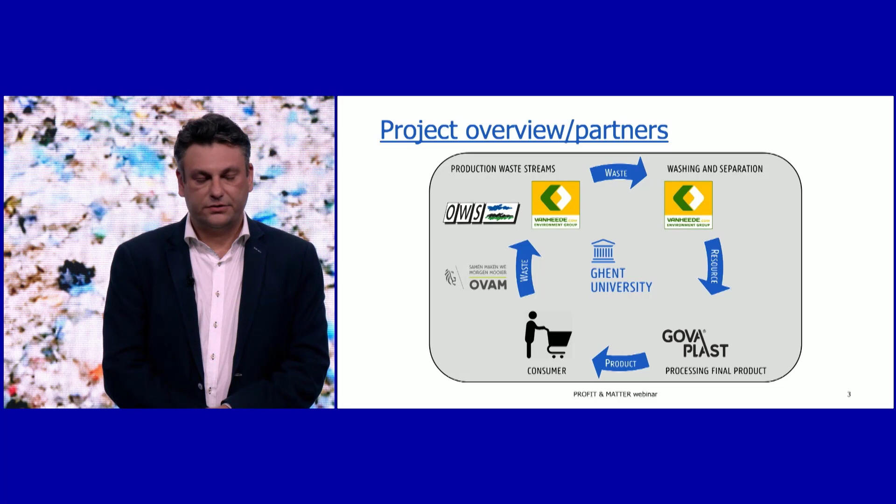Thank you, Nico. I will go further with the technical side of the project. The aim of the project was to develop new value chains for plastics coming from complex waste streams. A key term here is reverse engineering, in which we focus on the physical properties of the end product.

In this way, we will try to recycle and purify these streams up to a level compared to the properties of these end products, and therefore we will implement a fit-for-use separation.

Two case study streams were tackled within the project. One coming from separated food waste, where the food is separated from the plastics. The organic fraction is sent to anaerobic digestion, and the packaging waste is our first case study.

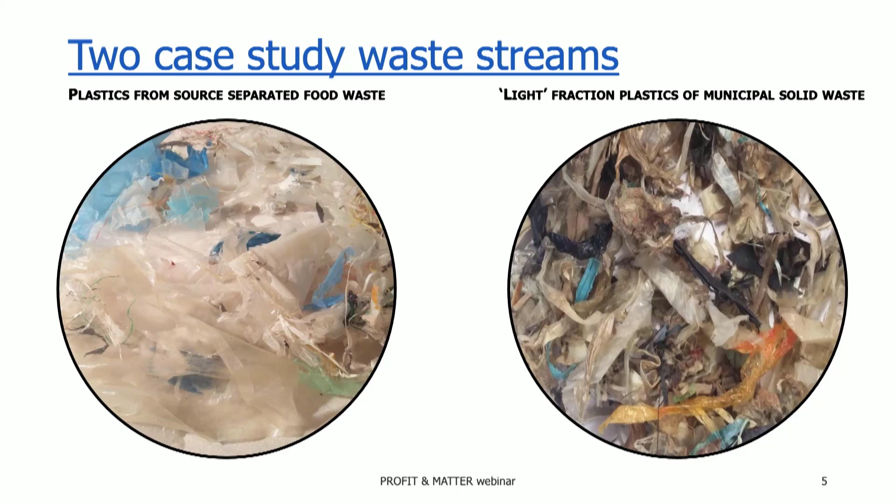A first research area within this project was the separation technologies. It's important to focus this research on new and innovative ways to separate different plastics, and one such technique is selective flotation.

In this project we focused on the sink fraction polymers, PET, PVC, and PS. The principle of selective flotation can be seen in the bottom figure. Here it will be the intention to make one polymer more hydrophilic than the other polymers in the mixture.

It has to be said that in general, polymers are hydrophobic by nature and will therefore adhere air bubbles. Different methods are possible to make one polymer more hydrophilic than the other polymers in the mixture, and this we tackled in the PROFIT project.

The first series of experiments were focused on the treatment and adsorption of surfactants, followed by a flotation in water. In the figure on the left, you see the recovery rates of the different polymers studied. And from these graphs, it's clear that separation is possible.

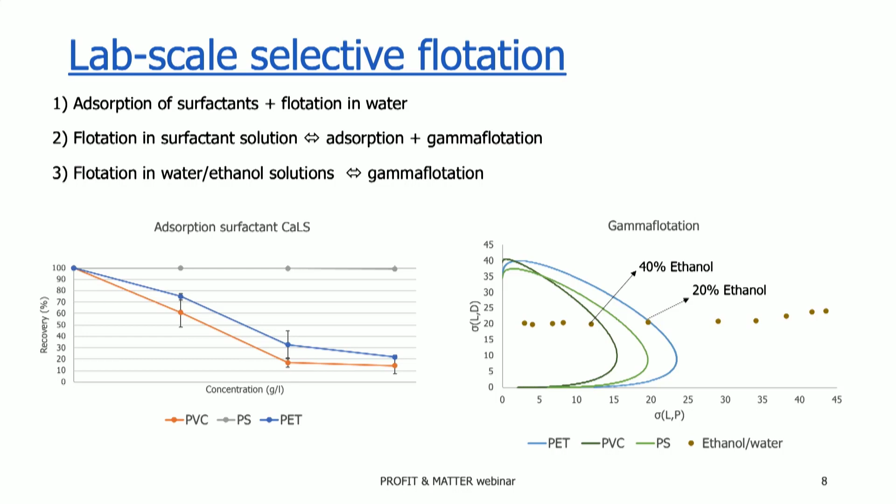And the larger the difference between the different graphs, the easier and the less recirculation of the sink fraction is needed. A second series of experiments were focused on the flotation medium itself, because this also has an influence on the suppression of plastics. Here we did the flotation in adsorption solutions, in surfactant solutions, sorry. And in this way, we were able to suppress more plastics by this technique.

The third series of experiments were focused on gamma flotation. This is a phenomenon in which only the flotation liquid is important in the flotation, in the selective flotation separation. From these measurements, it was clear that we could receive a good separation between the different polymers.

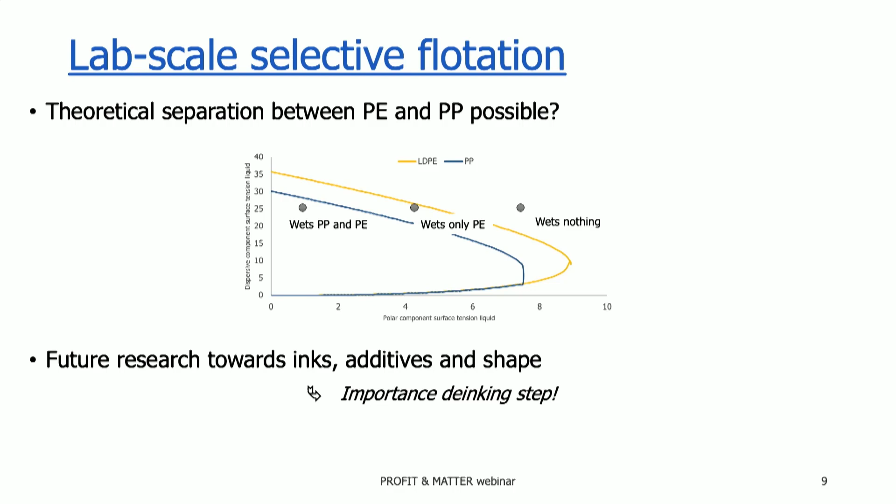In this project, it might even be possible to cause a separation between polyethylene and polypropylene, and this you can see on this figure. This figure is called a wetting envelope and shows in which area a certain liquid will wet the plastics, and that plastic will not be able to adhere air bubbles any longer.

It has to be said that complex waste streams are more complex, and that future research had to be focused on the presence of inks and additives, which has a direct influence on the suppression rate of the plastics. Also shape is an important factor to be covered in future research.

Also on an industrial scale, we did some tests, and therefore we hired a centrifugal decanter. With this machine, we were able to separate the heavy and light fraction of both waste streams into two dry fractions, one heavy one and one light one. The plastics of Vanheede and OWS are showing promising floating solids, and those light fractions can be recycled at Govaerts.

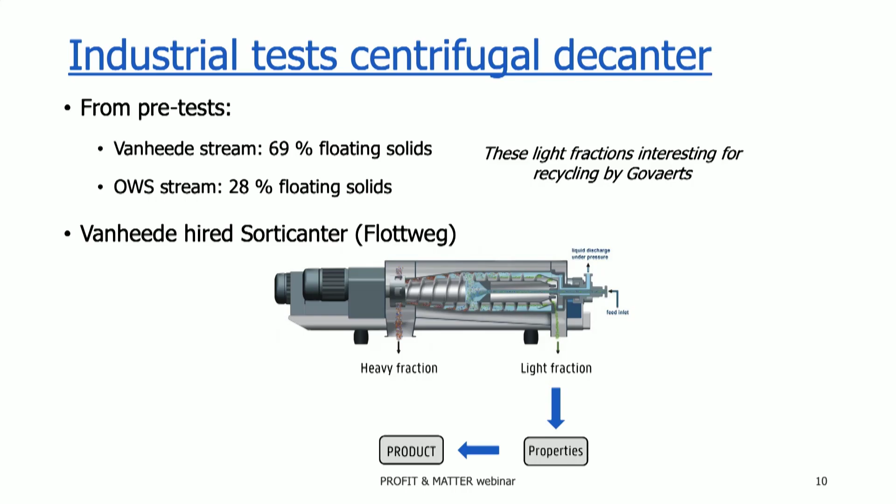The principle of the Sorticanter is based on density, but here the gravity force is partly removed and replaced by high acting centrifugal forces, and therefore the separation is much faster than conventional sink-float setups.

Then the light fraction of the Vanheede stream showed a good composition and has a high polyolefin content. And after separation with the centrifugal decanter, most of the heavy polymers were removed. Then the stream was processed on a lab scale, and the properties were determined, and they showed good properties.

But the problem is still that a large fraction of wood is available in the stream, and there is also still a presence of bad odor. It also has to be said that the machine is prone to blockage for certain waste streams.

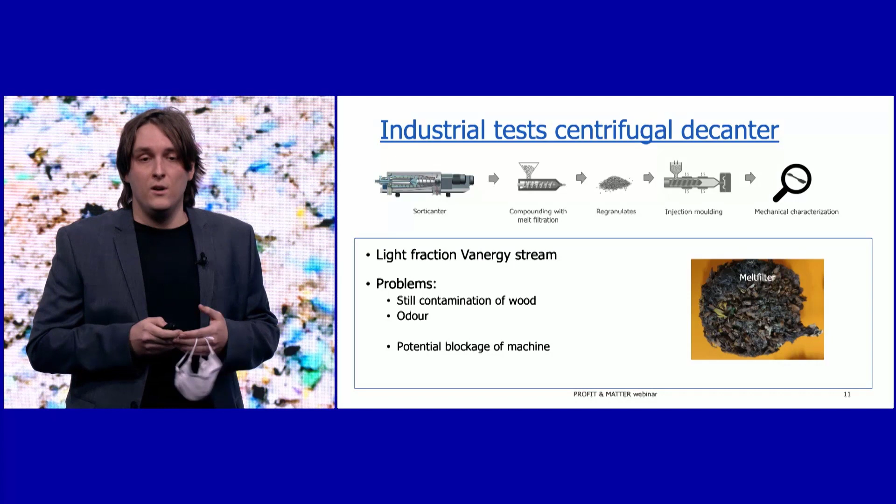Hi everyone, my name is Martijn, and I will now present you the results we have achieved within the PROFIT project to improve the pre-treatment of plastic waste. I will start with our research into the deodorization of plastic waste.

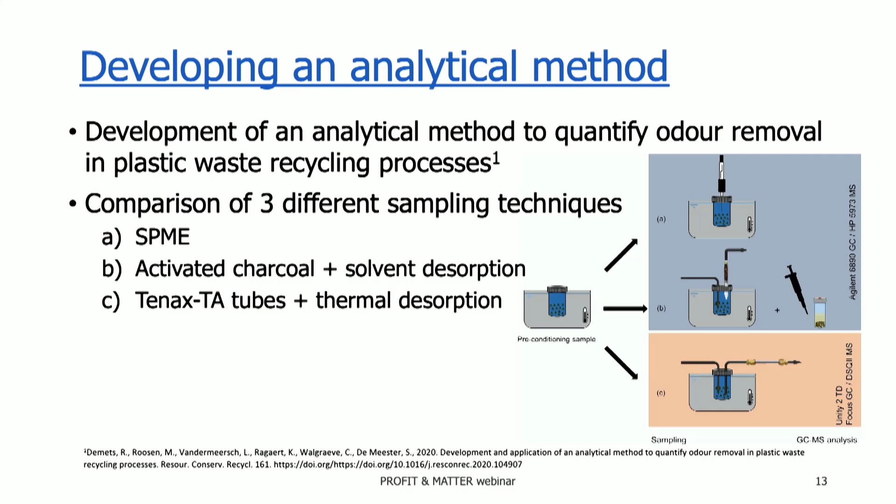So for this, we first developed a method that is able to quantify odor removal in plastic waste recycling processes. For this, we have compared 3 different sampling techniques. First of all, SPME. Our second technique was activated charcoal in combination with solvent desorption, and the third technique was Tenax tubes in combination with thermal desorption.

With those 3 different sampling techniques, we were able to identify 73 different odorous constituents that were present in a post-consumer plastic waste stream. We have categorized those 73 odorous constituents into different chemical classes, such as terpenes, sulfurous components, and oxygenated components.

Comparing those 3 different techniques, we saw that, for instance, SPME showed quite high applicability, but that this technique is not so good to achieve repeatable results. But on the other hand, again, with SPME, it is quite easy to identify the components.

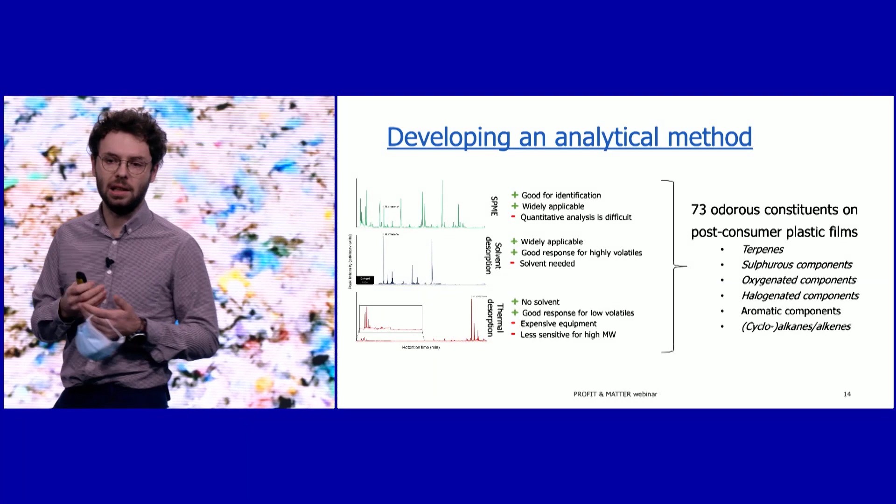The second technique that we tested was solvent desorption, and also this technique is widely applicable. Moreover, this technique shows a good response for the highly volatile components. But for this technique, of course, a solvent is needed, which is, again, a disadvantage.

For the thermal desorption method, no solvent is needed, and a quite good response for the low volatile components was achieved. But the disadvantage here is that it was less sensitive for the high molecular weight components.

We have applied those 3 different sampling techniques in a case study where we monitored the potential odor-causing components through a recycling chain. As you can see on the figure on this slide, we identified quite a lot of odor components on the dirty films, shown on your left-hand side.

We have categorized them as a function of their boiling point and their octanol water partition coefficient. This last coefficient is a value for the polarity of those components.

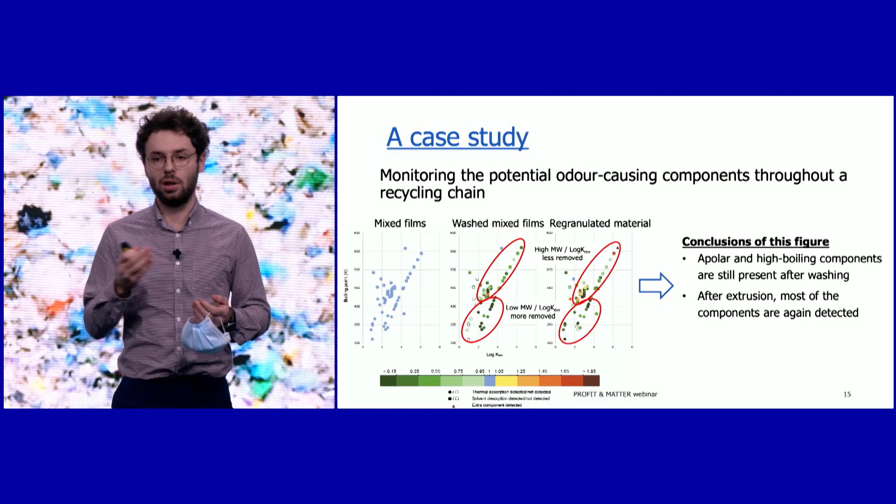After washing, we saw that most of the odor components were reduced in intensity, which is of course because they were washed. But we also saw that the more polar components were more removed, since their color is more dark than the more apolar components. This can be explained by the fact that we used water as a washing medium.

Then after the regranulation step, we see that certain components are present again, and even in a higher concentration than the initial concentration, as you can see on the slide where the components are visualized in red.

So the main conclusions of this slide are that apolar and high boiling components are still present after the washing step, and secondly, that after extrusion, most of the components are again detected, and sometimes even in a higher concentration.

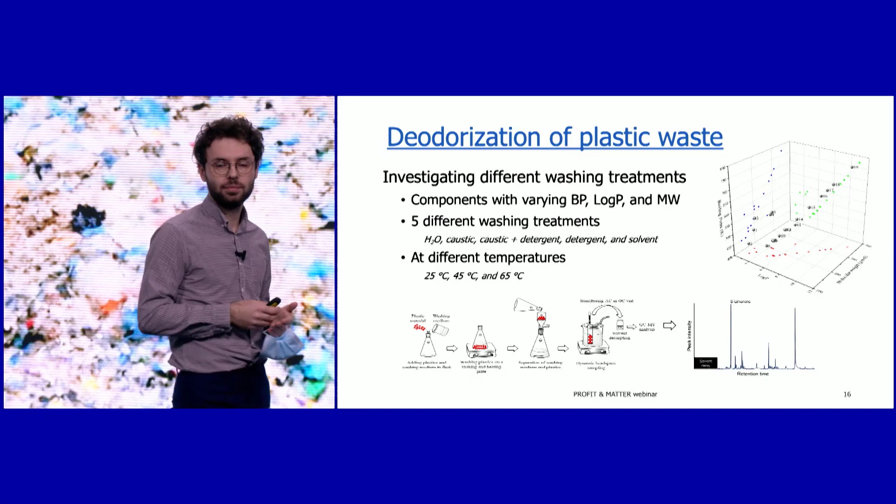Then our next step of our research was to investigate more fundamentally the deodorization of plastic waste. To this, we have first selected 19 odorous components that have a varying boiling point, octanol water partition coefficient, and molecular weight. And we have applied 5 different treatments, namely water, caustic soda, a combination of caustic and a detergent,

only a detergent solution in water, and a solvent. We have performed our analysis at 3 different temperatures, namely 25 degrees Celsius, 45 degrees Celsius, and 65 degrees Celsius.

As a next step, we have then linked the experimentally obtained results to a kinetic and isotherm model. Here we saw that from all the models that we tested, the Fritz-Schlunder isothermal model in combination with the reversible first-order kinetic model gave the best fit.

When we look at the results, we see that sodium hydroxide, so caustic soda, was not so efficient to remove odorous constituents, even less efficient than water, actually.

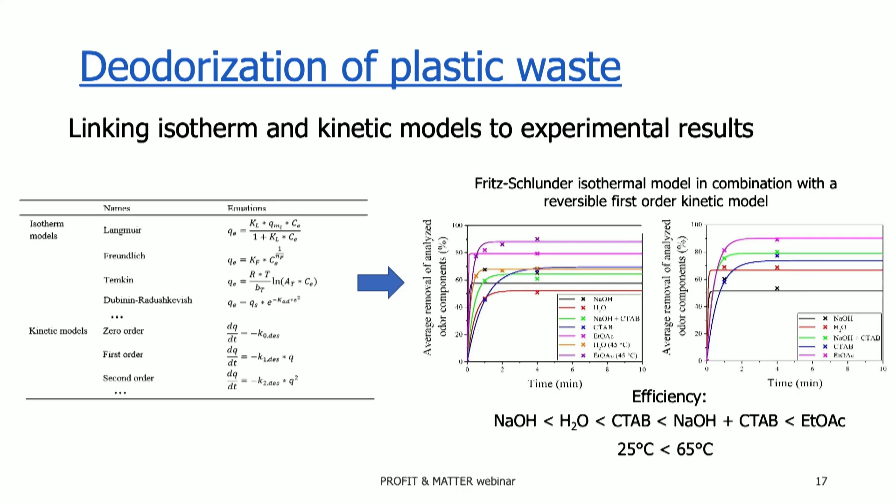By adding a detergent, in this case CTAB, the removal efficiency was seriously increased. And the best removal efficiency we obtained by applying a solvent, in this case ethyl acetate.

Another thing that we saw is that the higher the temperature, the better the deodorization. So 65 degrees Celsius gave better results than, for instance, 25 degrees Celsius.

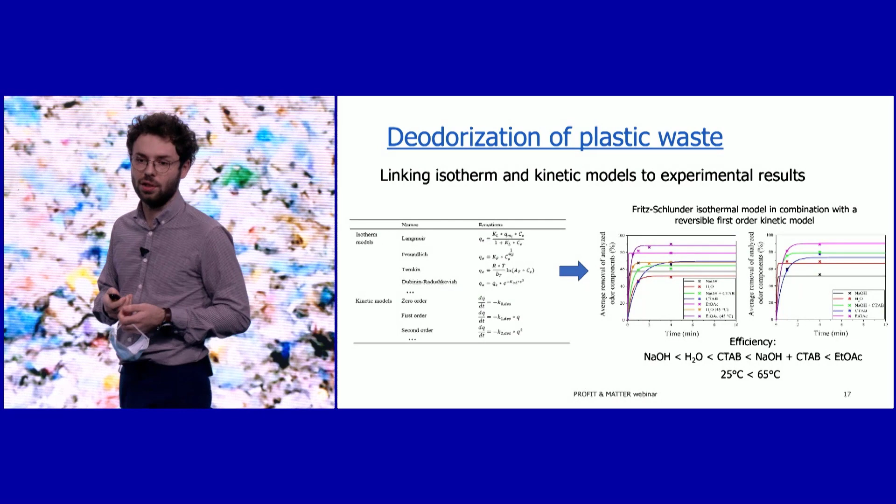These things can be explained by considering the deodorization process as a solid-liquid extraction process. Typically, such a solid-liquid extraction process is influenced by the polarity of the extraction medium and by the temperature, what we also saw for deodorization.

Then, as a next step, we have performed some Aspen simulations to investigate a bit more in depth some industrially relevant parameters, such as solid-liquid ratio, residence time, and recirculation rate.

What we saw here is that the solid-liquid ratio was quite an important factor, since the higher the solid-liquid ratio, the lower the efficiency that we obtained.

On the other hand, the residence time is not very important, let's say, because what we saw is that an equilibrium was already achieved after 2 minutes.

But our third factor, the recirculation rate, again is a quite important factor and maybe even one of the main hurdles to increase the deodorization efficiency, because what we saw is that applying a recirculation rate of more than 60%, as you can see in the yellow circle, significantly drops the deodorization efficiency.

Knowing this and taking into account that currently most companies apply a circulation rate of more than 90%, this explains, of course, the relatively low deodorization efficiencies that are currently achieved.

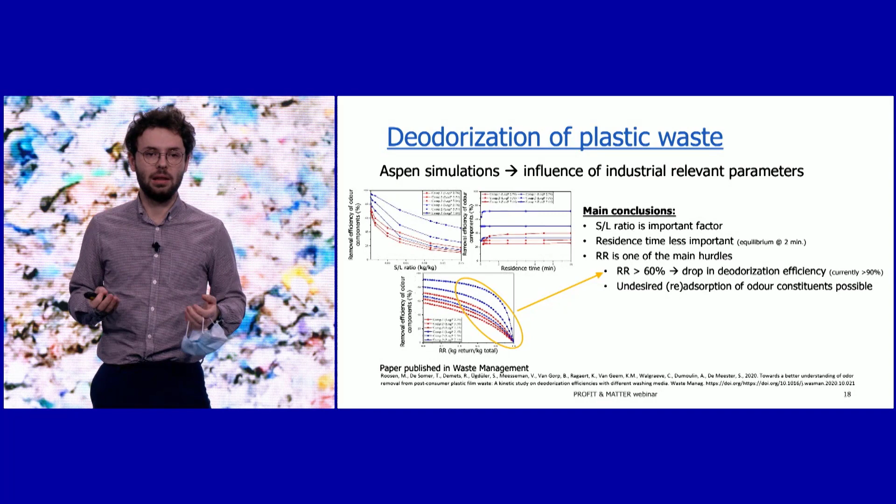If you think back to our kinetic model, which was a reversible first-order kinetic model, this can explain our results, because what we see is that not only desorption takes place, but at the same time also adsorption from the washing medium to the plastics can take place.

Now I will shortly introduce our research into the de-inking and delamination of plastic waste. What we have done here is we have tested different mediums and at different conditions, and we have always optimized our procedure until at the end we had a method that was able to remove all the inks and adhesives present on plastic films.

So you can see here some results that we have obtained, with on your right-hand side a completely de-inked plastic film stream.

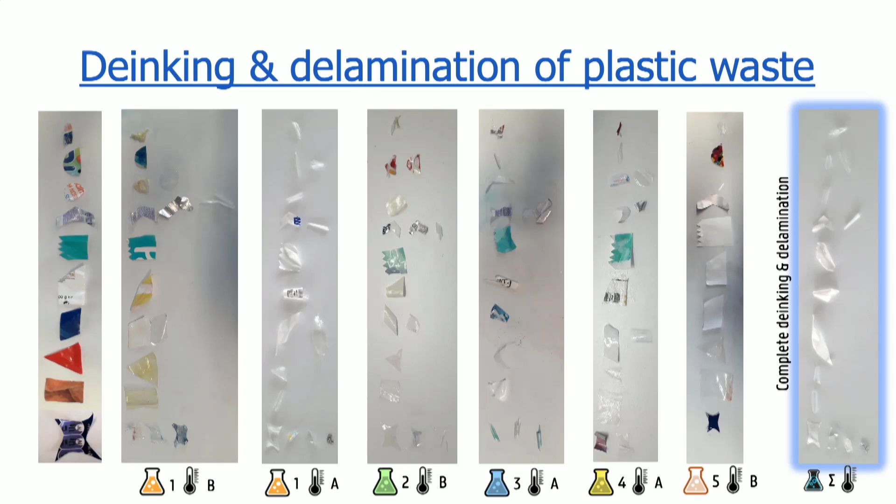As a next step, we have optimized this method, and for this we first developed a method to quantify both the de-inking efficiency and the delamination efficiency.

The method to quantify the de-inking efficiency is based on color mapping, and the method for the delamination efficiency is based on an FTIR analysis. As such, we were able to optimize our process in terms of solid-liquid ratio, shear rate, temperature, and so on.

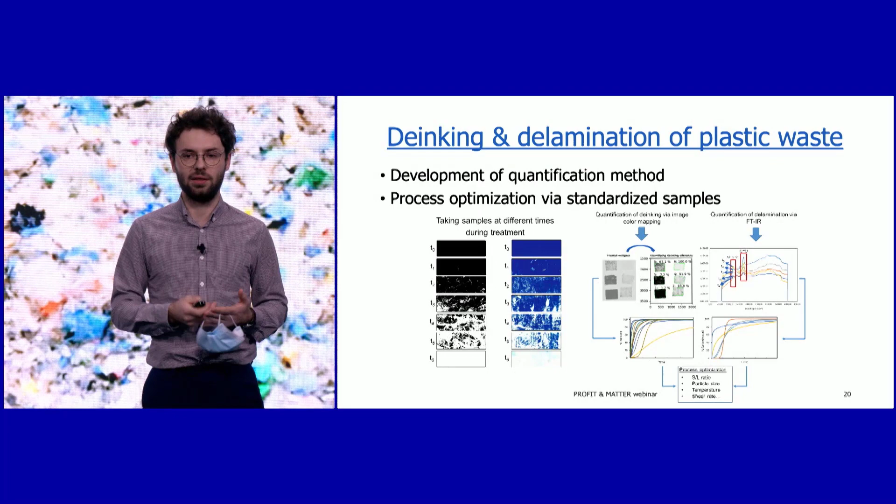We have filed a patent for this method, so at this moment we cannot fully disclose our method yet, but we can say that we have tested our method on a real waste stream, as you can see in the picture on this slide. This gave very good results. As you can see, all the printed films were de-inked after our procedure. We are currently doing research to upscale this method, so in the future this might be applied by industry.

We will now see two videos, one from my colleague Ruben, who you already saw, and one from my colleague Sibel Ugdeler. Ruben will first show the film blowing process, and then Sibel will show you the de-inking process in the lab.

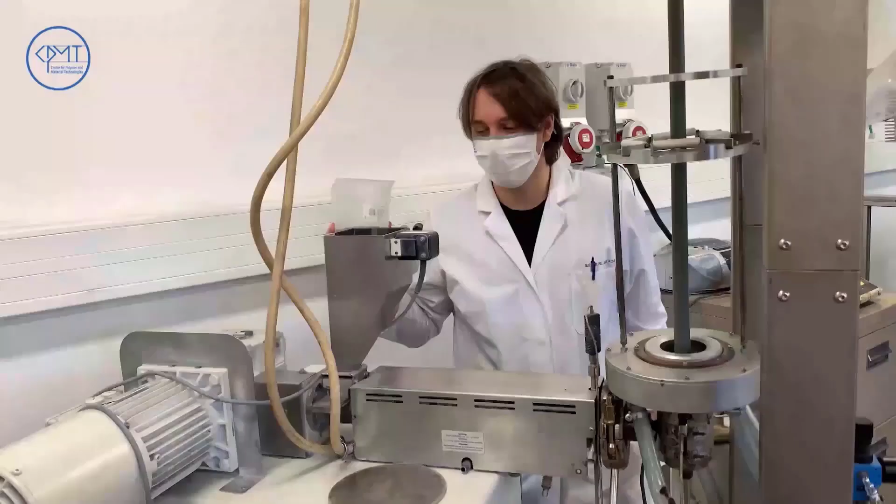Plastics coming from packaging waste pose a major recycling problem. Creating closed-loop systems for these valuable materials is difficult. Post-consumer waste streams, like the ones considered in the Matter and Profit project, contain a lot of plastic and non-polymeric contaminants, such as metals, paper, and wood. In this video, we are showing the film blow process. This polymer processing technique is very delicate, and the presence of these contaminants will cause problems during processing. You can also see that recyclates often have a dark color. Therefore, research on de-inking, delamination, and on separation of these contaminants is crucial.

Hi, my name is Sibel Ugdeler. I'm a PhD student at the LCPE Research Group at Ghent University. Now I will demonstrate some experiments on removal of different types of inks from plastic films.

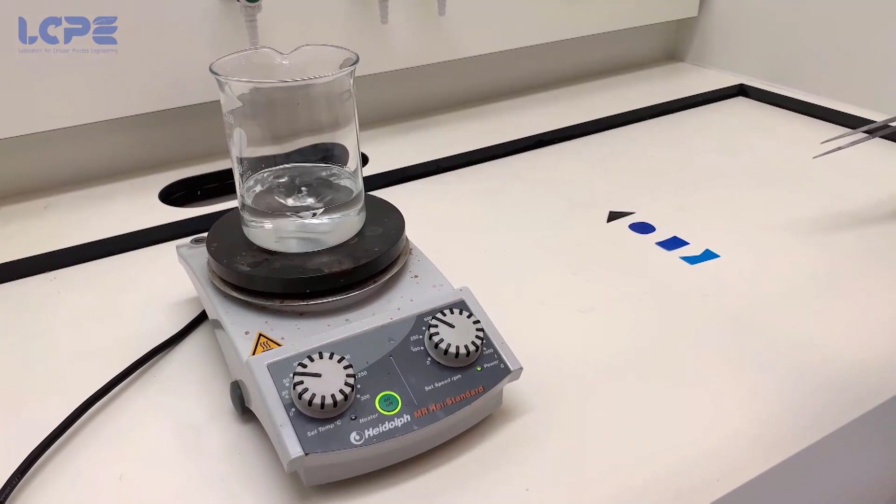Here we have 4 different samples. The first two are printed with solvent-based inks, the next one is with water-based ink, and the last one is printed with UV-based ink. After we cut them into different shapes to recognize them more easily, we bring them into contact with the de-inking medium.

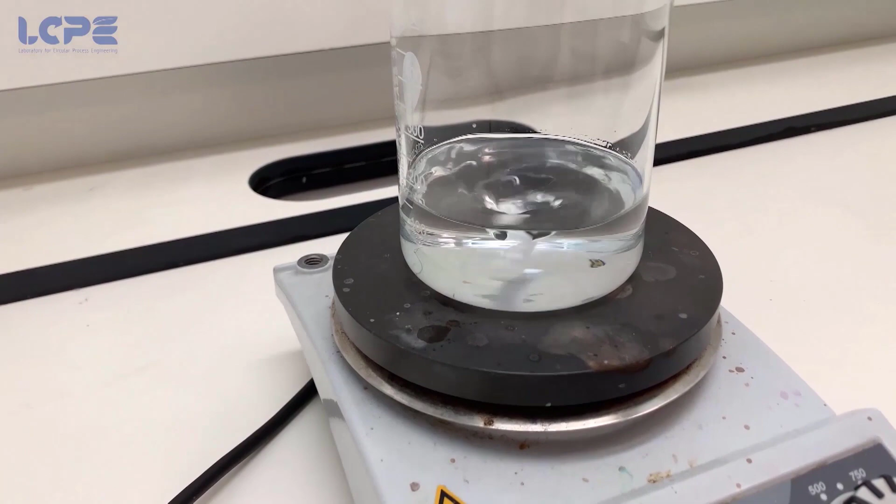Normally, UV-based cross-linked inks are one of the hardest inks to remove. But as you see here, with our developed de-inking procedure, we are able to remove all different types of inks successfully and in a short time frame.

As you can see here, in case of multi-layers, first we delaminate the sample before the de-inking step.

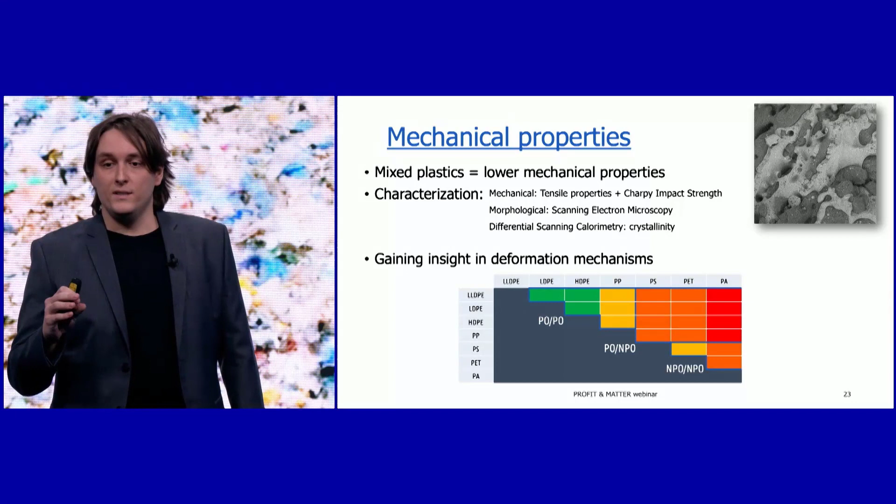A third area within the research of Profit was on the recycling quality of waste plastics. Mixed plastics, when remelted, form a phase-separated structure, and therefore often have lower mechanical properties. In order to map the influence of different polymer combinations, we produced blend series, and for these blend series the different mechanical properties were determined. The morphology and crystallinity of these polymer systems were also considered.

The table on the slides shows the theoretical compatibility between the different polymer pairs. With this research, we gained insight into the occurring and changing deformation mechanisms of these blend systems.

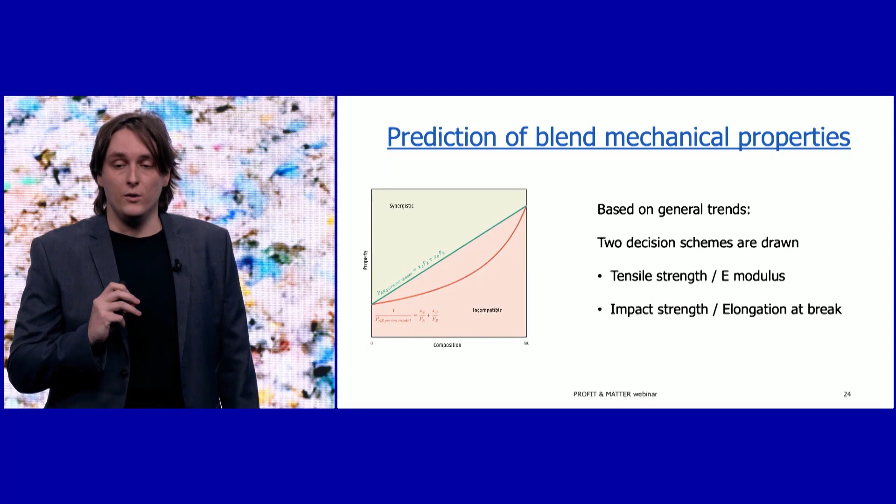Next, we set out the properties and function of the contaminating polymer, and based on general trends we were able to devise two decision schemes. One is focused on tensile strength and elastic modulus. Another one is on impact strength and elongation at break. This is such a scheme.

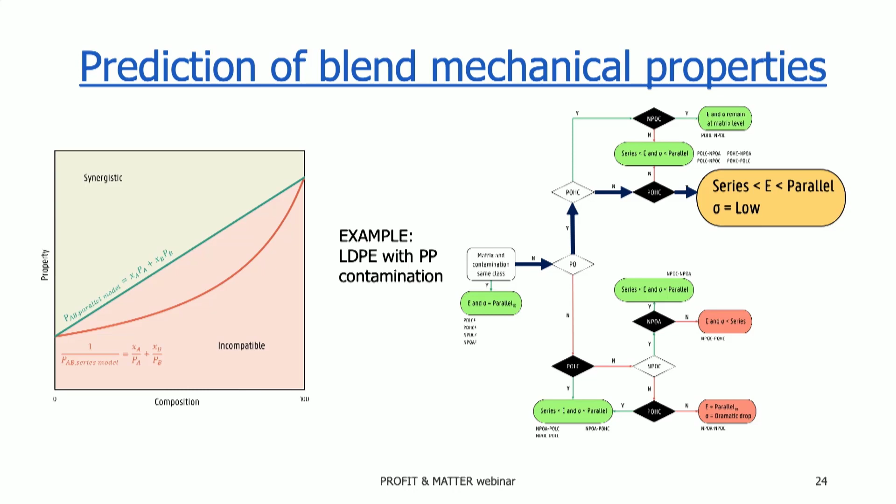This scheme should give a clear image of the recycling potential of a plastic stream. A little example: if you have an LDPE contaminated with PP, the scheme will tell us that this will lead to these properties.

Of course, future research will focus on improving these predictions of mechanical properties by gaining insight into mixes of different grades of polymers, and also on the influence of non-polymeric contaminants.

In the Profit project, we also reflected on the total quality and the features that are important for the total quality of waste plastics. We focused on optical properties, content of harmful substances, and processability. In next research, we will try to combine these different features into a single recycling quality factor, ranging from 0 to 1. We want to create a quick vision of a waste stream's quality based on this recycling quality factor and on the pretreatments required to gain new recycled waste products.

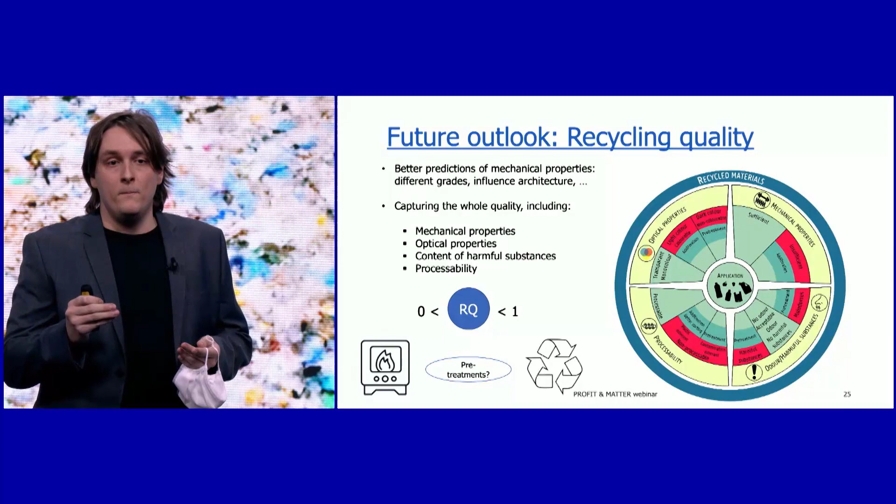Now we will see another video by Vanheede that will show the reflections of Vanheede on the Profit project.

Vanheede Environment Group is a fully integrated waste management company, and our aim is to be active in the circular plastics economy. In the Profit case, we can collect and sort the plastics in our automatic sorting plant, and the final recycling step is also done in-house. Our collaboration within Profit gives us the opportunity to test several plastic waste streams and to meet potential partners in the whole supply chain. This is useful for establishing a circular business model for plastics.

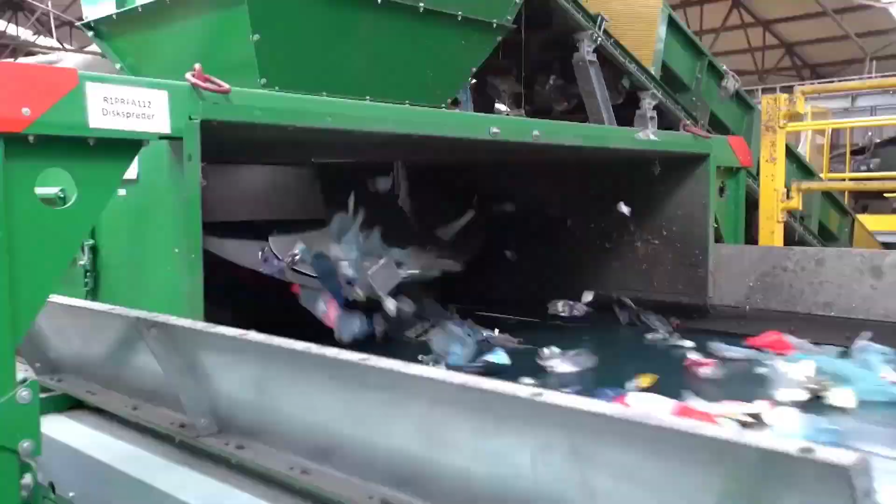We had very good support from Professor Steven de Meester and his Ghent University team. They provided support for the academic and the very practical issues.

There we have it. That was quite condensed and at quite a high pace, a lot of the results from the PROFIT project. As you can see, a lot of scientific and technical advances were made that help us understand better what these plastics are, what their challenges are, and how we can advance towards solving them. But we're also not quite there yet. So this type of value chain cooperation remains very important also towards future projects, to keep doing exactly that and to keep advancing us to full circular plastics.

With that, we can wrap up the first part, which was the presentation of the PROFIT project results. And we are now moving on to the second project, which is the MATTER project.

MATTER handled the streams coming from the P+MD bag and was, as a project, coordinated by the company Indaver. That is why, to present to you these results, I would like to invite Mr. Erik Moerman from Indaver.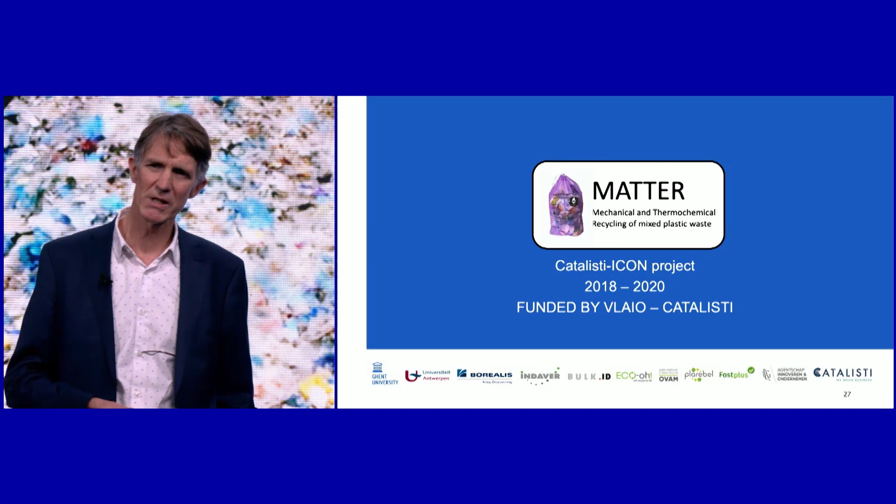In the slides that will come after mine, you will see what the successes are. I think it's also important to mention that next to these partners, there are also some stakeholders that we involved - experts in the recycling of plastics, which are OVAM, Plarebel, and also Fost Plus. Fost Plus will also be part of the panel discussion later on - their expertise was very welcome. We brought all these partners together, and that was definitely with the help of Catalisti, who helped us write the project, looked for the right expertise and so on. We are very grateful that Catalisti was helping us with this project.

And at the end, I think we need to thank Vlaio, because the money that we used to go through the different steps of the project came from the Flemish government through the body Vlaio.

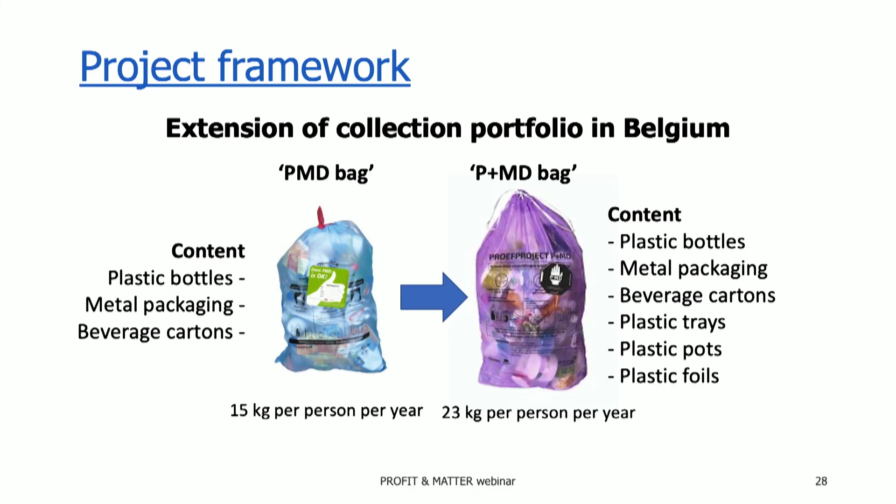The base of the project, where this started, was this new initiative to extend the blue bag as we know it in Belgium, where we have collected for many years the different packaging waste from households. At a certain moment it was decided to extend these bags to new fractions, mainly fractions of plastic waste, like plastic trays, plastic pots, plastic foils. With this, the amount of packaging waste collected increased by an extra 80 to 100,000 tons per year in Belgium.

Now, what was the goal of the project? At the end, we were able to develop a set of criteria to support the decision towards the optimal plastic waste management scheme. What is a good, or complete, waste management scheme? That starts with really knowing the waste - and Martin, who follows after me, will explain a little bit more on that. But you have collection, you have sorting, you have pre-treatment.

I think what is quite unique in this project is that we also made comparisons between mechanical recycling, a technology that already exists for many, many years, and thermochemical recycling. We compared both, and the comparison was made based on two evaluation tools: on the one hand the technical-economical analysis, and on the other hand the LCA. Before jumping to the final conclusion, I can already say we really see there is a big gain to be made in terms of CO2 avoidance by recycling these extra plastics.

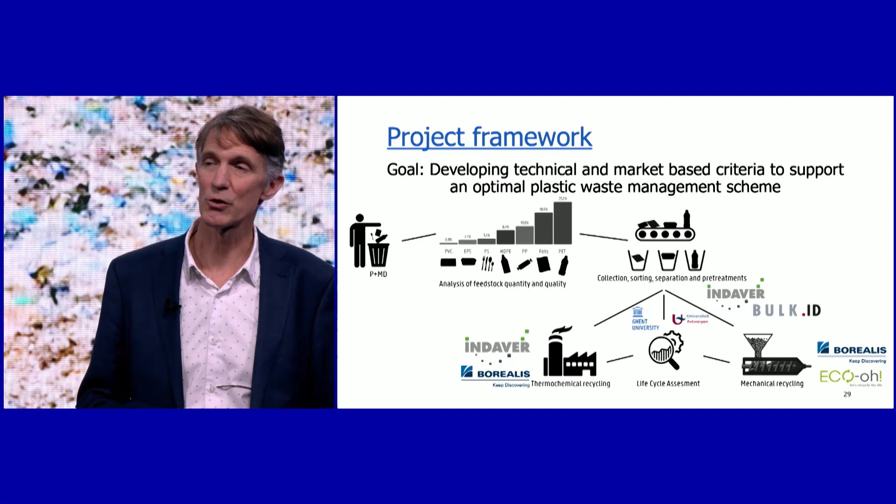So I would like to give the floor now to Martin. Thank you, Erik.

Hi again. So I will now present you the first work package of Matter, namely the analysis of the feedstock quantity and quality. To recycle plastics in high-value applications, it is important to know the composition of the waste. And by the extension of the blue bag, there came some new waste streams on the market that were not fully known yet. Therefore, we decided to first characterize those new waste streams.

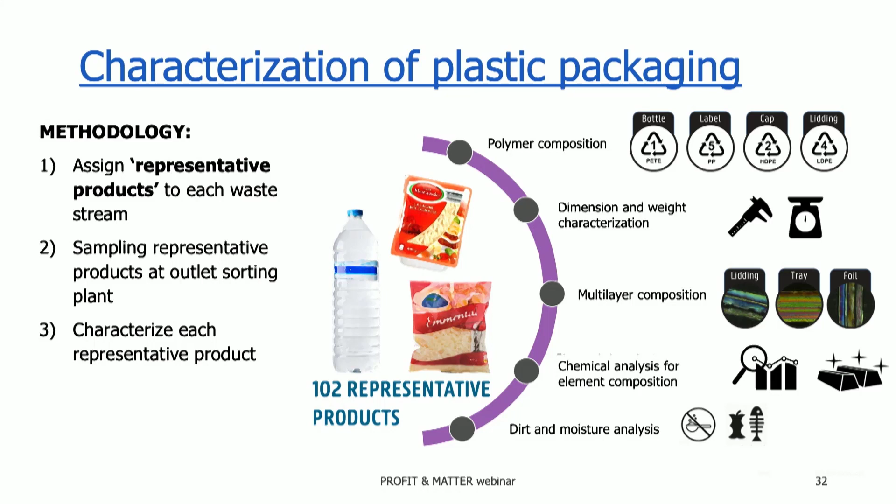For that, we have applied the following methodology. First, we have assigned representative products, as we call them, to each waste stream. A representative product was selected based on the sales numbers of the biggest Belgian food retailer. By this methodology, we were able to cover a more relevant fraction of packaging products present in waste, and we were also able to average out seasonal and geographical variation.

After assigning those representative products, we sampled different representative products at the outlet of a sorting plant, and then started characterizing them in the lab. This included, among others, the polymer composition, the elemental composition, the moisture and dirt fraction, and so on.

Furthermore, we have divided each product that we selected into its separable components. So for instance, a PET tray we divided into the tray itself, the lid present on the tray, and the label present on the tray. We have analyzed each of those different separable components individually.

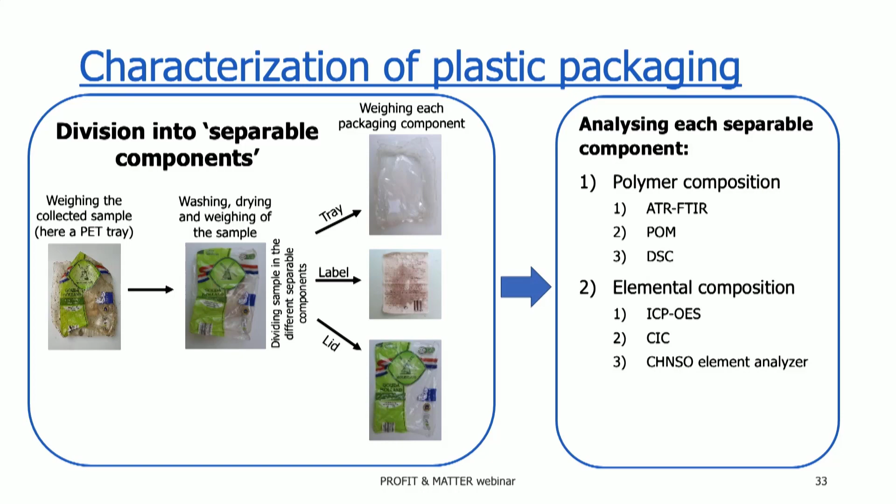On each component we applied ATR-FTIR analysis, POM analysis, and DSC analysis to characterize them in terms of polymer composition. We also applied ICP-OES analysis, combustion ion chromatography analysis, and CHNSO analysis to determine the elemental composition. Here on this slide you can see the polymer composition.

We don't have enough time to go into detail, but I will guide you through the main conclusions we can draw from this figure. For PET bottles, we see that a relatively pure stream is achieved, but caps and labels present can contaminate this stream, which mainly consists of polyethylene and polypropylene.

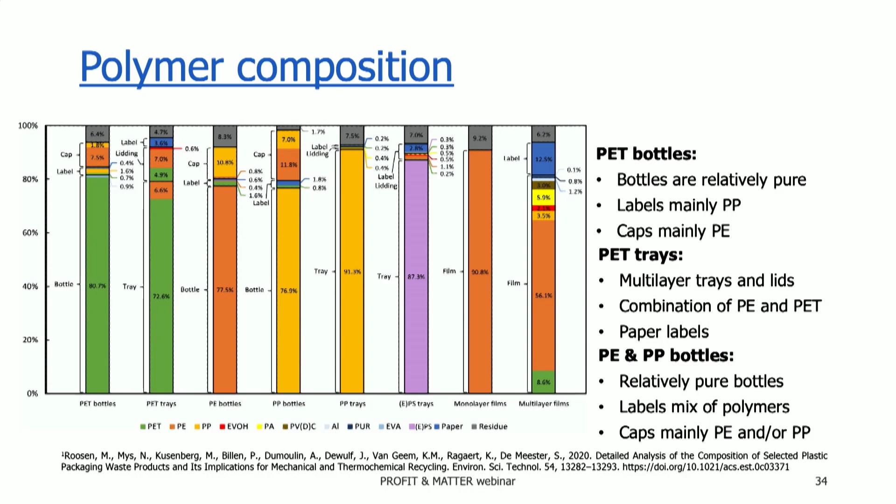PET trays are a bit more complex because they are often multi-layer, consisting of polyethylene and polyethylene terephthalate. Also, sometimes there are paper labels present on the PET trays. The PE and PP bottles were relatively pure streams again, but labels and caps with a composition like polyethylene and polypropylene can again contaminate these streams.

For the trays, we saw relatively pure streams for PP and EPS, but again labels and liddings can contaminate these streams. For the film stream, we distinguished between monolayer and multilayer films. The monolayer films mostly consisted of polyethylene, but for the multilayer films, many different polymers were present, among others PET, PE, PP, EVOH, polyamide, and so on. Also, sometimes those multilayer films contain a certain paper label.

This polymer composition is very important for mechanical recycling, because what we see is that if certain polymers are blended together, this can deteriorate the quality of the recyclates produced. This can be explained by the morphology of those blends, which sometimes have a droplet matrix morphology, which can induce propagation of cracks and brittle behavior.

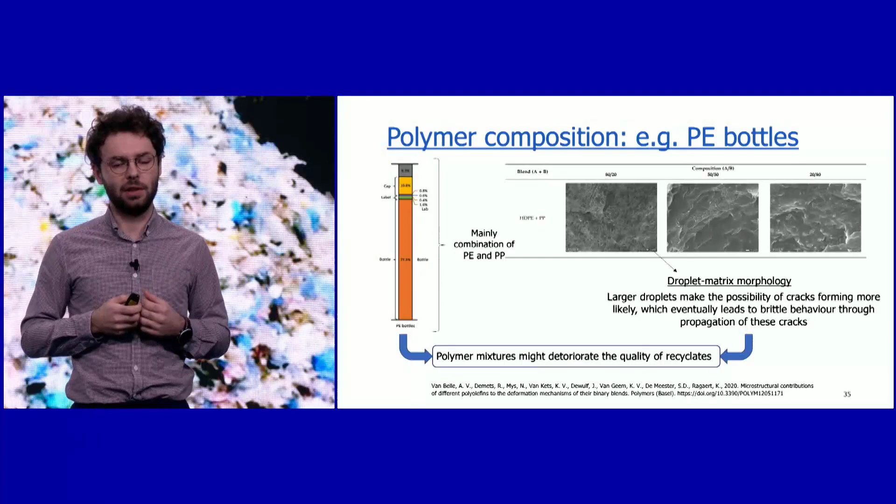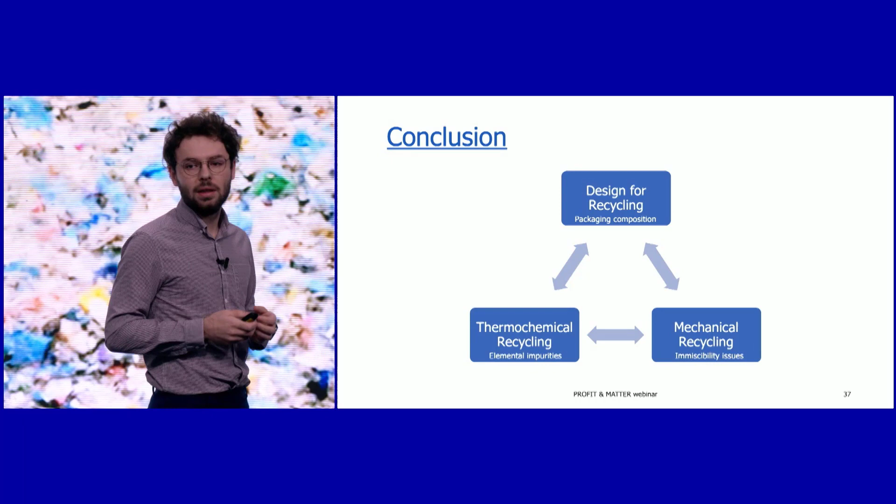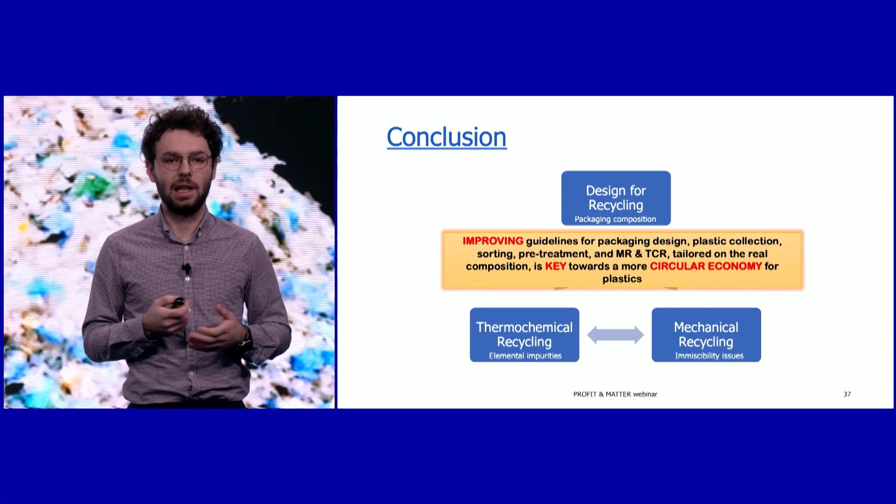As a conclusion, I would like to say that both thermochemical recycling and mechanical recycling are still facing certain issues or challenges. I have put a third factor here on this slide, and that's design for recycling, because often those issues come from complex packaging. Working together within those different factors can really improve recycling. So improving guidelines for packaging design, but also for plastic sorting, pre-treatment, and mechanical and thermochemical recycling is really necessary, tailored to the specific composition of waste towards achieving a more circular economy for plastics.

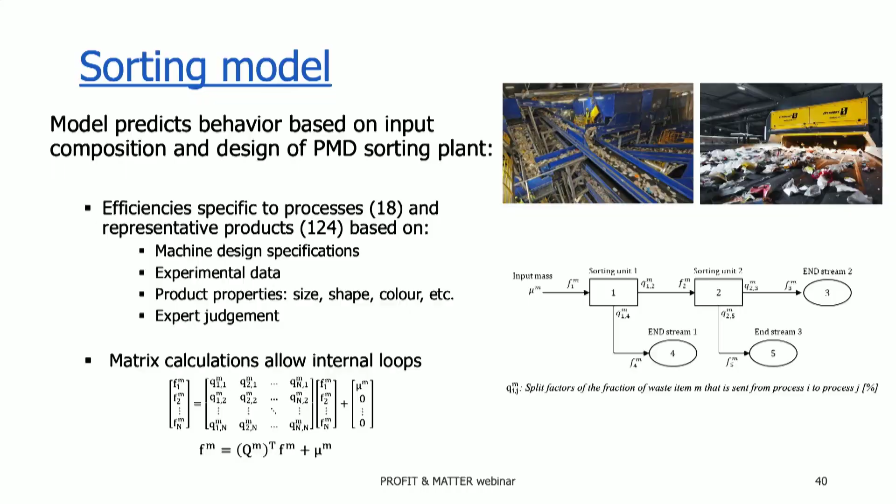But in this case, we thought, in fact, we want to develop scenarios to compare mechanical and thermochemical recycling. We want to make scenarios, so we want something more modular compared to sending one big bag of waste, which is difficult to take in a representative way. So we wanted a model to do this in a more flexible way.

If you look at a sorting plant, as I mentioned, it's very complicated, but while the amount of equipment is high, the types of equipment are not. In general, there are NIR separators, ballistic separators, eddy currents, drum sieves, and a few others. The different types of equipment number only around 7 or 8 or so.

So we thought if we know this process a bit better, then maybe we can develop a flexible model to predict how waste flows through these sorting plants.

At that point in time, that was a big job, but we had a good thesis student. Thesis students are the free labor of universities, in case they are good, of course. Sometimes they are also the opposite. But if you have a good thesis student, you can make nice progress, and in this case we were lucky to have someone like that. We just said, let's start this and see where we end up.

What we did was look at these sorting plants from a real system view, and we see that every process has a certain separation efficiency, which we call a split factor. This split factor determines if you have 100 PET bottles going into a process, like a NIR PET sorter, how much of these PET bottles end up in the positive direction. But also, if there is still PS on that conveyor, how much of the PS is mis-sorted on a PET NIR, and so on. So we have positive and negative sorting.

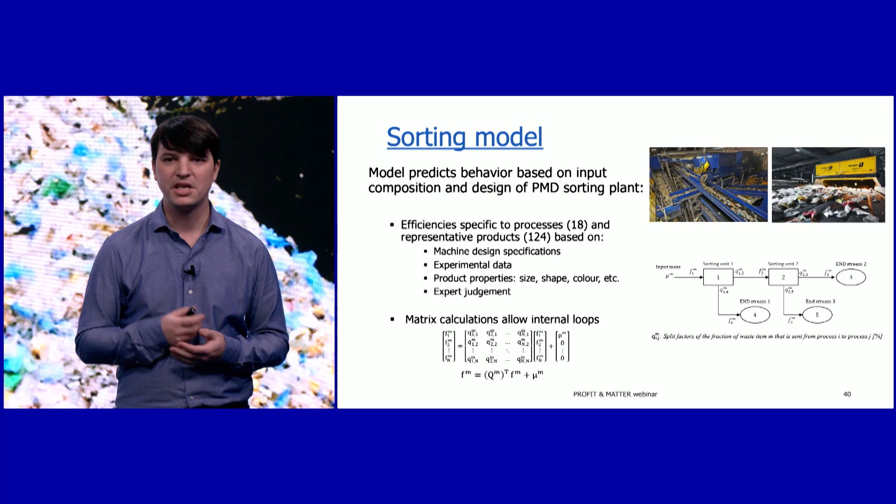In the end, we put this into a nice mathematical formula. As many PhD students know, if you work on recycling in Excel, Excel doesn't like loops, and then it crashes. So if you want to avoid loops, and of course sorting plants have a lot of loops, we used an elegant matrix calculation to overcome this problem, I would say.

So what we then did, we made this big table, what we call a split factor table, which basically says which types of products—by the way, the same products as those that we analyzed in work package 1—go where. In the rows are the types of products, and in the columns are the types of equipment present in a sorting model.

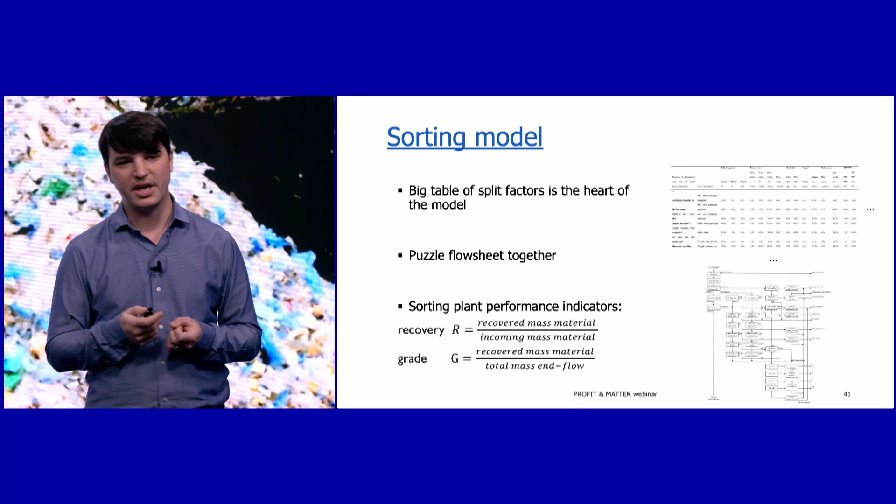So we developed this big split factor matrix. This is really the heart of the model. Based on the matrix calculations, we can model any type of sorting plant, so we can flexibly adjust the type and design of a sorting plant, and the model gives you the output bales. For these bales, we define the recovery, which is, if you put 100 PET bottles in at the entrance of the sorting plant, how many PET bottles do you get out in the PET bales. Then the grade is, in the PET bale, how much other product, how much PET is really in there, how much contamination. So the yield and recovery, or grade and recovery, is what you finally get out of the model.

So we validated the model. That's, of course, as with any model, important to do. On the top left of the slide, the orange bars show we validated this on the PMD. In Belgium, the PMD was actually already running, so we had experimental data to compare our model results with. We were pleasantly surprised that we had quite a good comparison between the model results and the experimental data, which gave us confidence that this modeling approach is not so bad.

So we went on and tried to predict the P+MD scenario. At that point, around one or two years ago, we didn't have much data, especially on the new sorting plants being built as we speak. So we didn't have that data yet, but we were able to see, if you give the expected P+MD input composition and the expected designs of sorting plants, what recoveries and yields would we achieve? We were pleasantly surprised to see that the sorting plants about to be built will probably, according to our modeling results, meet the specifications required in most categories.

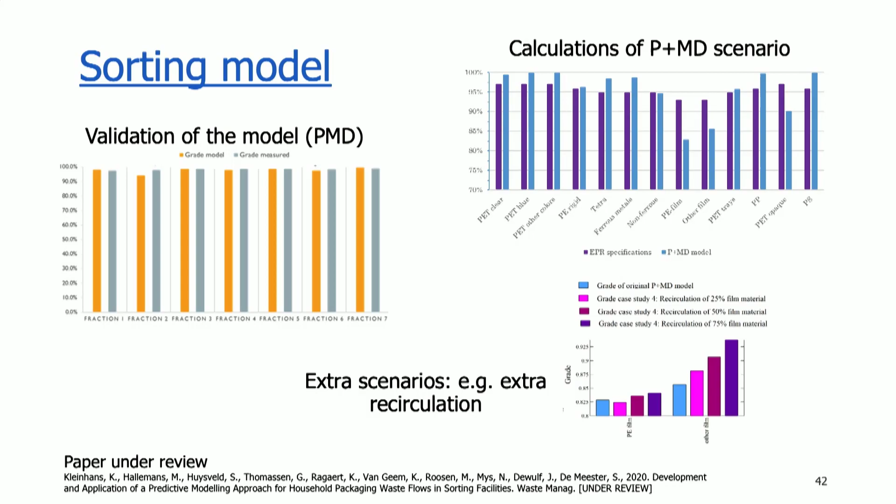There was a bit of danger, going from PMD to P+MD, that nice fractions like PET and HDPE bottles would become more contaminated. But in fact, our results show this is quite okay. Even after making the bag more complex, these new sorting plants, which are more complex compared to the PMD system, are still able to achieve high purities for the PET and HDPE bottles. So that was very nice to see.

The film fraction is a bit more difficult, because you have PE films and other films, and the sorting plant has to play between how much PE film purity it can really achieve compared to the other film fraction. We also face some difficulty defining what is a PE film and what is other film, because many films contain some PE, and it's hard to decide where to put the boundary between the two. So the film stream is quite a complicated one.

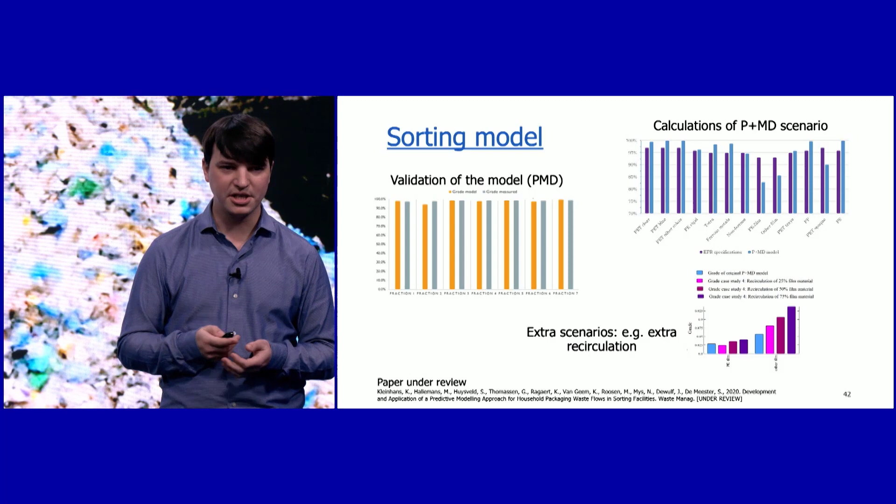We also did some scenarios, because the film stream is one of the more difficult ones, creating internal loops in the sorting center to predict how these loops affect the purity and recovery of the film fraction. This shows that you can use new designs and route other products through the sorting plant in the model and see how they come out, and also change designs in the sorting plant to see how that affects the recoveries and yields.

In my opinion, the true power of what we did, if I'm allowed to say so, is that we can combine work package 1 and work package 2. Work package 1 has a very detailed compositional analysis, where we have these products well defined, the caps, the bottles, the liddings, the labels. We know how much chlorine is in a label, how much metal is in a cap, so we have a very good understanding of the composition. If we combine this through the model, we are able to say, without going into the details currently on the slide, how many caps are there.

Also, what I didn't stress too much yet is the LAMD, the level of attached moisture and dirt. So how much of that moisture and dirt do we expect in every bale? How much metals come through mis-sorting in a certain HDPE bale? Or how do films distribute throughout a supply chain, throughout the sorting plant, and which fractions do they end up with? And with that, how many labels on these films end up in these streams?

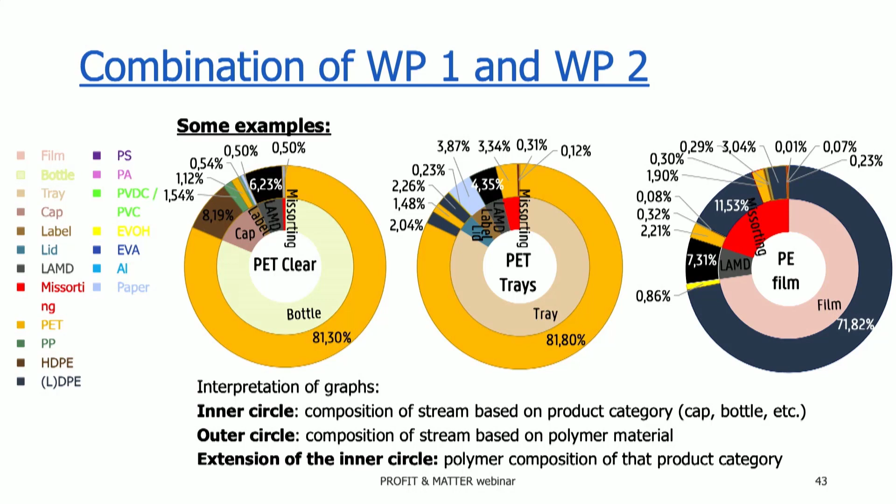So the positive and negative sorting we can predict on a deeper level, in my opinion, comparing how this affects the total metal concentrations or polymeric compositions of these different bales that you expect in a system. Summarizing, we have developed a model where you can give in your input stream, puzzle your flow sheet of the sorting plant together, and combine this with elemental, metal, and polymeric compositional analysis to predict how these bales come out, which is relevant for both mechanical recycling and thermochemical recycling. This is important feedback for the later work packages.

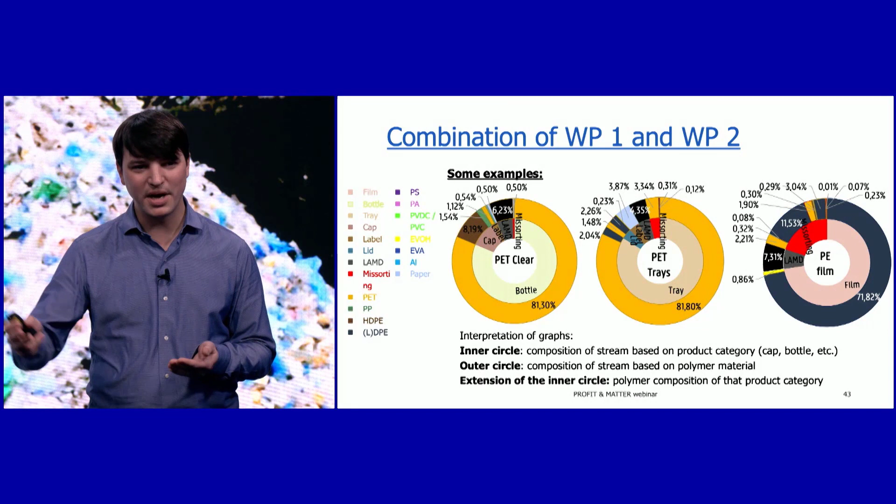So after this sorting, we would go to washing. During the profit presentation, we already spoke a bit on these washing techniques, so I will not do this here in this presentation, but I will give the word to ECO, who for many years already have been really active in recycling, doing it on the floor, recycling tonnages of plastic. In that sense, they have a really important role. They are not here today due to COVID, but I want to stress how important they were for the project, and therefore I would like to give the word to ECO, who recorded a video for us.

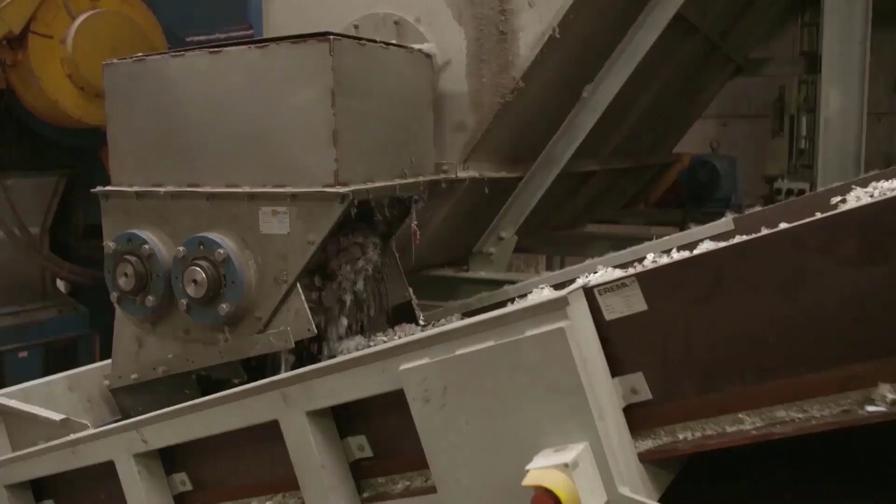At ECO, we are happy to take part in the MATTER project. Working in co-creation together with other organizations who share the same values results in remarkable synergies. All organizations contributing to the project are working towards the same goal: improving the recycling of mixed post-consumer plastics in order to create a sustainable future. This is also what we do at ECO every day, but in co-creation with others, this is more effective and the impact is more extensive. We experienced that the combination of academic knowledge and research together with industrial experience brings us further than alone. We want to thank all the partners for their cooperation. Sincerely, thank you very much.

The Matter project wants to make a trade-off between mechanical recycling and thermochemical recycling. In order to do this, we focus on different sorted out fractions of the P+MD system. Now I will explain the results obtained for mechanical recycling for different streams.

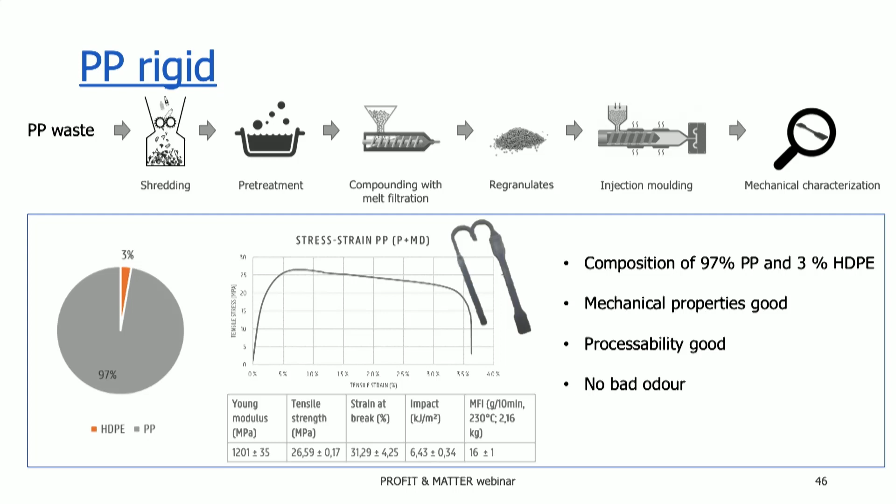The first stream is a PP rigid fraction. This waste stream consists of about 97% PP and only 3% HDPE contamination. We started from the PP waste, but also from a fraction obtained after industrial melt filtering by ECO. Lab scale testing showed that the PP stream had good processing and mechanical properties, and no bad odor was remarked. Then, in cooperation with the manufacturer Keter, we tried to process planters, which are injection molded products with a wall thickness of 4 to 5 millimeters. To conclude, we can say that the PP rigid stream was well mechanically recycled.

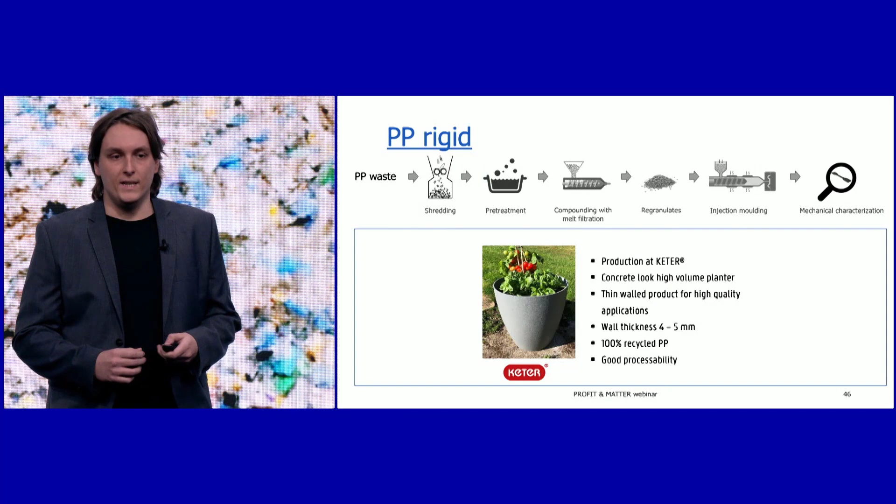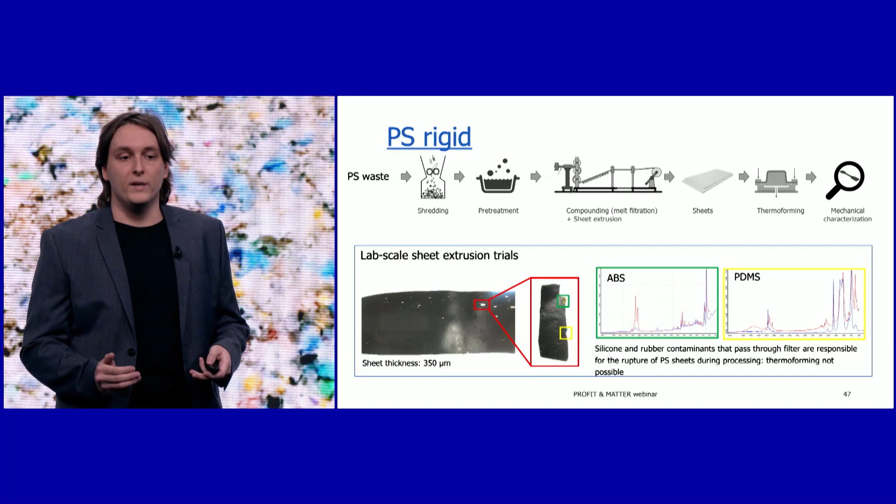A second stream on which we tried mechanical recycling was a PS rigid stream. This PS waste was shredded, washed, and then extruded into sheets for thermoforming. On lab scale, it became clear that other polymers were contaminating the waste stream, and those rubber-like components caused rupture in the polymer sheets during thermoforming and extrusion. So the lab scale testing failed for thermoforming of the PS sheet material. Two solutions can be offered to remove those contaminants: the first is melt filtration on an industrial scale, and the second is an extra visual sorting step during the sorting process.

Then a third fraction that we subjected to a mechanical recycling test is a PE film fraction. We wanted to again make film material from this waste fraction. The first goal was to scale the properties of the blown PE film waste against virgin LDPE and LLDPE blown grade polymers, and also against commercially available Ecoplast grades. A second goal was the processing of a de-inked fraction of the PE film fraction.

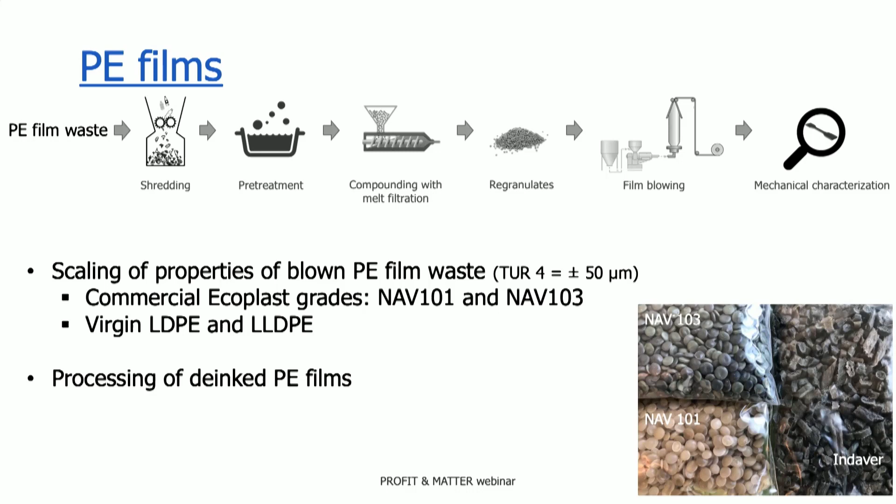We have to say that the PE film waste could not be processed into film again as such, and therefore it was decided to blend the PE film waste with film blown grade LDPE and LLDPE.

If you look at LDPE as a reference, we see that the blends with polyethylene recyclate have a lower MFI, but were well processable on lab scale. Also a higher stiffness, but reduced strength and elongation at break were remarked, and this can be caused by the contaminants present in this waste stream.

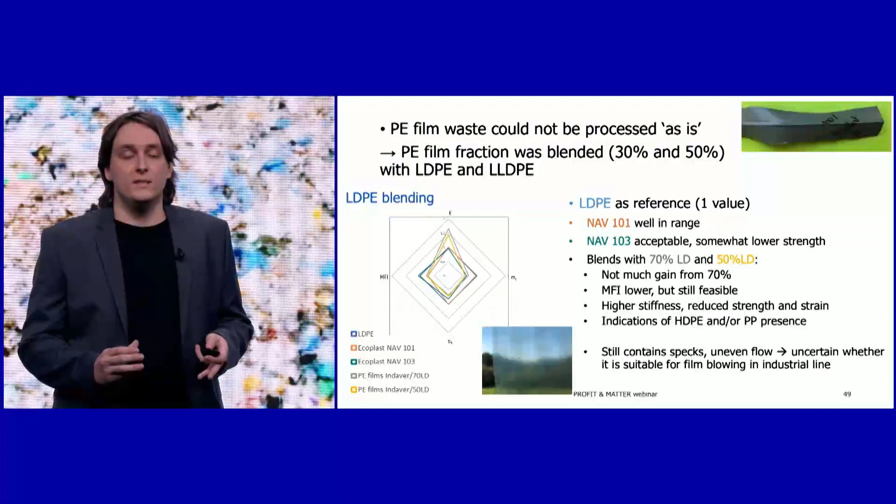If you look at the visual aspects of the PE film that we produced, we still see that the film consists of specks.

If we then look at the 50 and 70% LLDPE blends, we see that because the LLDPE has higher properties, the gap to be bridged by the PE recyclate is more difficult.

But we can again say that the processing on lab scale was good. The visual aspects are still lacking, and this is due to uneven films, a somewhat darker color, and the presence of specks.

So we can conclude that the PE films could not be processed into the existing recycled PE film quality. But we can consider blending with LLDPE, and in this way achieve a technical quality comparable to an LDPE polymer. Of course, it has to be verified whether this is cost effective, and also the processability to uniform film on a larger industrial scale is important.

For the de-inking step, we did a trial on a de-inked sample to see what's the positive influence on this processing. The film blow processing seems to be better, but it still contained a lot of contaminants that are not melting, and these non-melting contaminants cause rupture of the PE films.

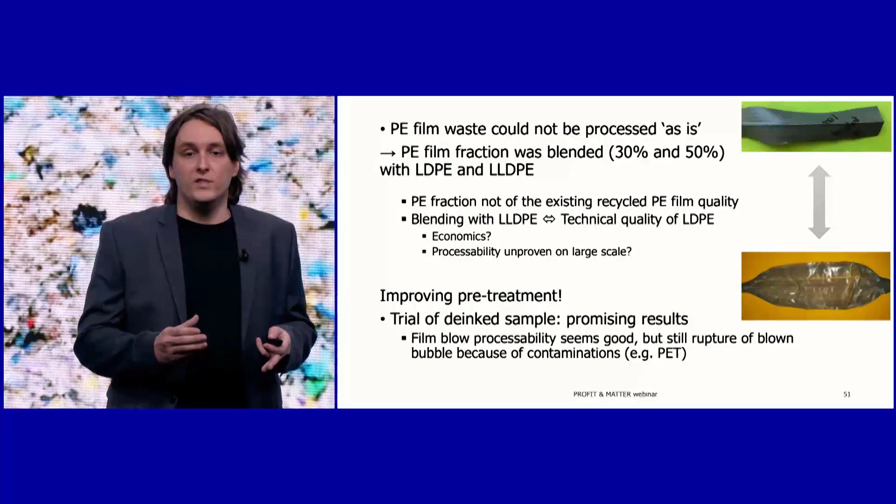We have to notice that an extra sink float step could be a possible solution to remove those higher melting polymers. And now we will go over to an extra video in which Borealis gives its reflections on the Matter project.

We at Borealis have highly valued the cooperation in the Matter project. The topic of assessing how mechanical and thermochemical recycling of plastics go hand in hand is also at the core of Borealis' own investigations.

The project consortium we felt was a strong one with a balanced mix of academic and industry partners. And last but not least, also the interaction of the project with the societal partners, Fost Plus, Plarebel and OVAM, was particularly interesting.

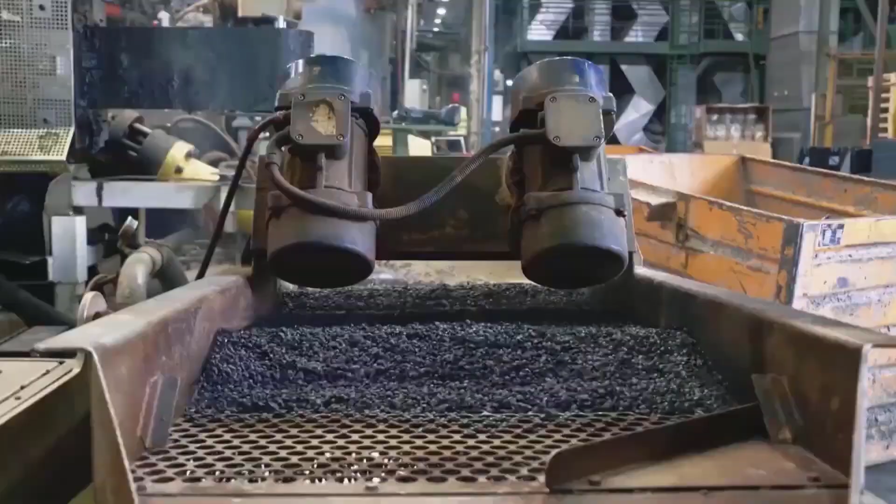For me personally, a highlight was surely in the summer of 2019, the joint visit and technical discussions with Professor Ragaert and Professor De Meester at the Borealis Innovation Center in Linz and at the Borealis Ecoplast recycling plant in Wildon, both in Austria. And the insights of this have also been captured in the Matter project.

In the next video presentation, Moerman from the LCT of University Ghent will explain the results obtained on thermochemical recycling.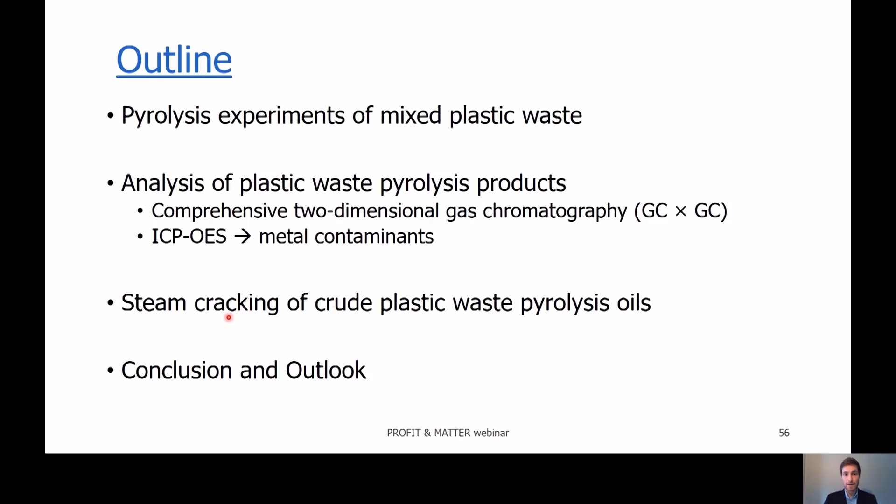The feedstocks used in this project were two MPO, so two mixed polyolefin feedstocks, MPO flex and MPO rigid, one PP waste feedstock, and one PE films feedstock.

Now the analysis results, GCXGC-FID, of the four respective waste feedstocks. We have four pie charts according to the four different waste feedstocks. We have the color schemes: blue for paraffins, orange for olefins, yellow for aromatics, and gray for naphthenes.

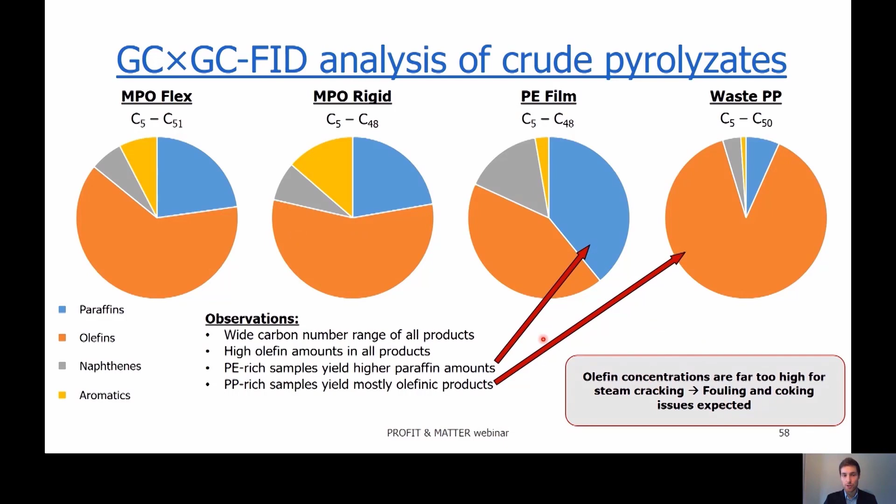Concluding, it can be said that the olefin concentrations of all four samples are still far too high for steam cracking. This means we expect a lot of fouling and coking issues in a steam cracker when cracking these fractions crude without further treatment.

Now, the metal analysis. What we want to know is the contaminant levels, because the contaminants in plastic waste pyrolysis oils are crucial—they're one of the key aspects, if not the key aspect, to assess the feasibility of steam cracking these feedstocks.

The question now is: is that already solving the problem? Have we already lowered the contaminants in our liquid pyrolysis oils far enough to use them as a steam cracking feedstock? Unfortunately not. The metal content of crude pyrolysis oils is still far too high for steam cracking, which leads to the conclusion that these feedstocks will have massive issues in a steam cracker.

This raises the possibility of distillation of the crudes as a further means to reduce the metal contents. For instance, we can remove most of the metals with heavier distillative cuts, and the light cuts which we need for steam cracking are then essentially metal free, but this is to be examined in the future.

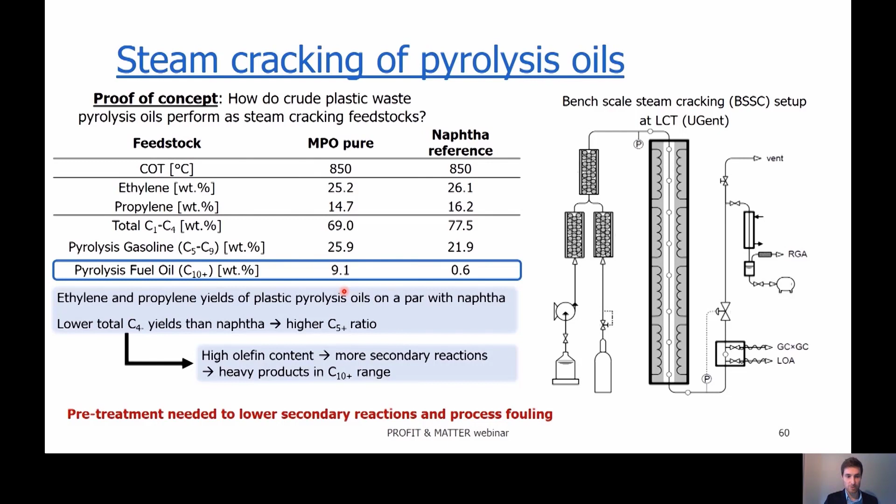This is mainly due to secondary reactions, which are caused by the high olefin content in the feedstock. That means these feeds need pretreatment. It's not feasible to use these feedstocks pure in a steam cracker because we have a lot of fouling and coking issues expected. So in order to reduce these tendencies, we need to pretreat these feedstocks.

As a conclusion, the plastic waste composition has a huge impact on the actual molecular composition of the oils. This was seen with PP-rich pyrolysates, which contain a lot of olefins, while PE-rich pyrolysates contain less olefins and more paraffins.

Regarding contaminant levels in pyrolysis products, around 99% of the metals end up in the solid coke. However, the remaining concentrations are still quite high, meaning we need to further lower these metal amounts in our liquid pyrolysates. As I said already, distillation can be an effective and rather simple treatment step, just removing the very heavy cuts, which most likely contain most of the metals.

The proof of concept experiments: we steam cracked crude plastic waste pyrolysates, and we have seen that the light olefin yields are quite nice, in a range with fossil naphtha, which is very good. However, we also see a lot of heavy products, mainly due to the high olefin content, which leads to secondary reactions, and ultimately to fouling and coking potential.

This has shown that we really need to pretreat these feedstocks to make them more feasible for steam cracking. Potential pretreatment was already mentioned with distillation to remove contaminants, but also hydrotreatment is a very potent technique to reduce unsaturated hydrocarbons and heteroatoms. Thus, using hydrotreatment, we can most likely produce a very nice feedstock based on plastic waste, comparable to fossil naphtha. Thank you very much.

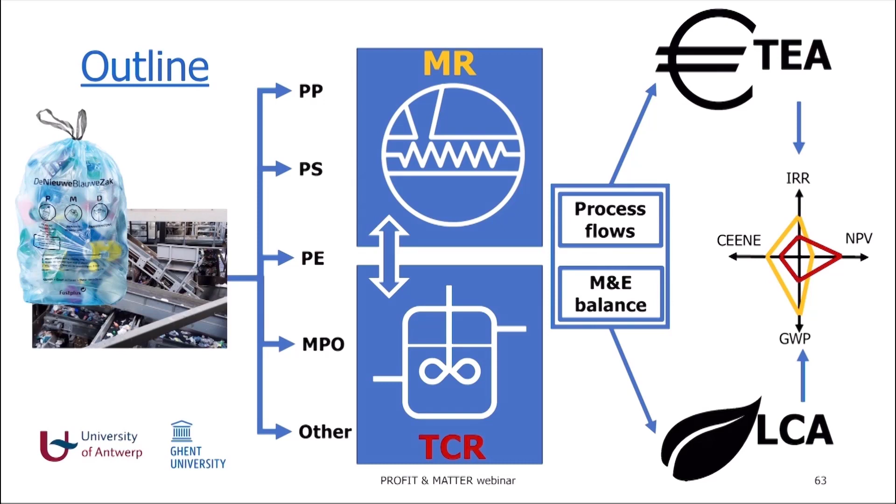In a nutshell, we considered challenging fractions from the PMD sorting facilities output, such as PP bottles and trays, PS trays, PE foils, MPO rigids, and other foils, as candidates for either mechanical recycling or thermochemical recycling. Via dedicated mass and energy balances, we performed a techno-economic assessment as well as a life cycle assessment. Ultimately, we produced a tool to balance the economic and environmental effects using different indicators in support of decision-making for different stakeholders.

In case of 1-to-1 substitution, we assume that 1 kilogram of recycled material substitutes 1 kilogram of virgin material. Third, the net impact is calculated by subtracting the credits from the burdens - the more negative the value, the better. However, to account for the potential different technical quality between mechanically recycled materials and their virgin alternatives, the credits are multiplied with a quality factor based on mechanical properties. This quality factor is a value between 0 and 1.

Additionally, when comparing both recycling options, an important difference is that current food contact regulations do not allow the use of mechanically recycled materials, except PET, in direct food contact applications. To account for this, we also multiply the credits with a market factor, representing the potential market share, thus excluding the food packaging market in case of mechanical recycling.

Hello, I'm Macarena Larraín and I will talk about the techno-economic assessment and the decision model.

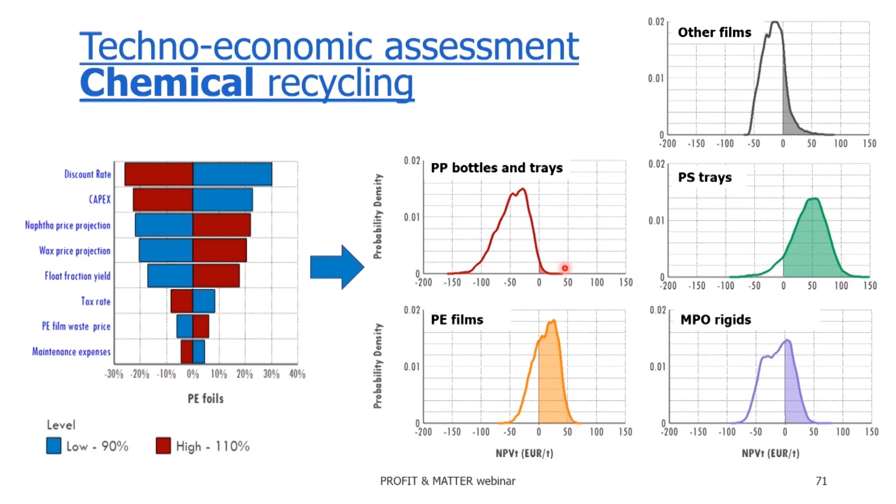For chemical recycling, which requires large investments, the discount rate and the capex are the variables with the biggest influence. Product prices, which are assumed to be coupled directly to oil prices, are very important as well. Results show a likely positive outcome for PE films and PS trays, yet a more challenging situation for PP bottles and trays, MPO rigids, and other films.

Let's move on now to the decision model that was developed with the software Analytica. In the blue area, we have the inputs for the TEA. In the red area, we have the inputs for the LCA. Then in this big yellow area, we get the results. In the input area, you can change some preset default values. If a user wants to, for example, analyze the situation in a different country, they would have to change the tax rate and, for example, the waste price, and insert the values for the country to be analyzed.

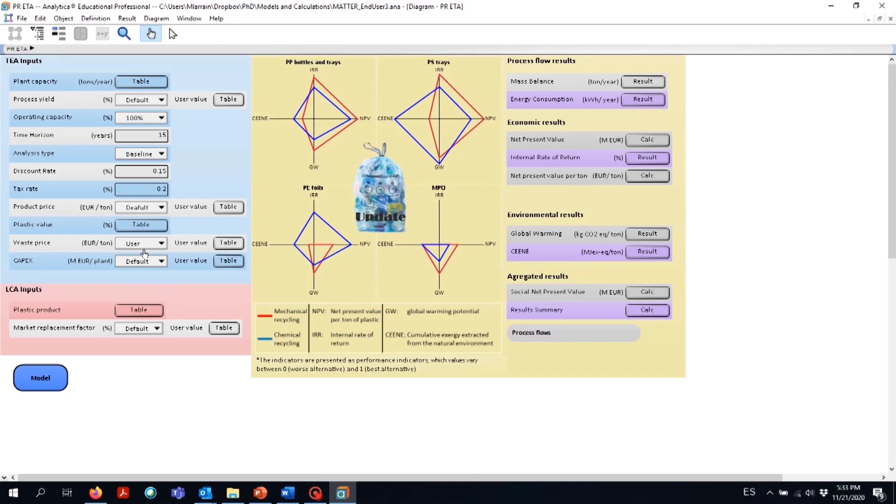These spider charts show the net present value, the internal rate of return, and the global warming performance indicator. To update them after changing the input parameters, you click on the blue bag. Then on these buttons on the right, you get detailed results of this and other indicators, such as energy consumption or social net present value, which includes the cost of carbon emissions. By selecting Monte Carlo over here, you get the probability distributions of the results.

Finally, the model shows the flow diagrams of the different recycling processes. Following this presentation, you can see a short video of Udo Kresovic on behalf of Indaver, exemplifying the value of the Matter project for Indaver. Thank you very much.

We will now go over to two videos. In the first video, as Macarena already said, Udo Kresovic will draw some conclusions from the Matter project on behalf of Indaver. In the second video, Marvin Kuzenberg will show the setup they use at LCT to perform their pyrolysis analysis and experiments.

Indaver is grateful to be a member of a broad consortium of academic and industrial partners assembled together in the course of the Matter project. In specific, we would like to thank Professor Dominguez, Professor Van Geem, and Professor Ragaert for all the work and efforts made in the course of the project.

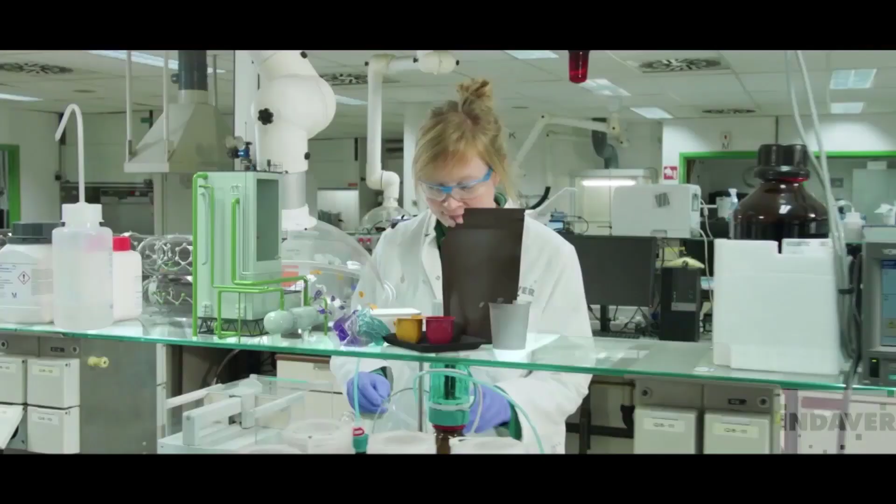In the sessions organized in the course of the Matter project, we got the opportunity to better learn the waste plastics landscape in Belgium and to compare different recycling routes, namely mechanical and chemical recycling. Life cycle analysis performed during the project showed clear benefits of using chemical recycling in reducing the carbon footprint of the plastics supply chain. At the end, we would like to thank all, and we are hoping to bring chemical recycling to maturity in the course of our plastics chemical development.

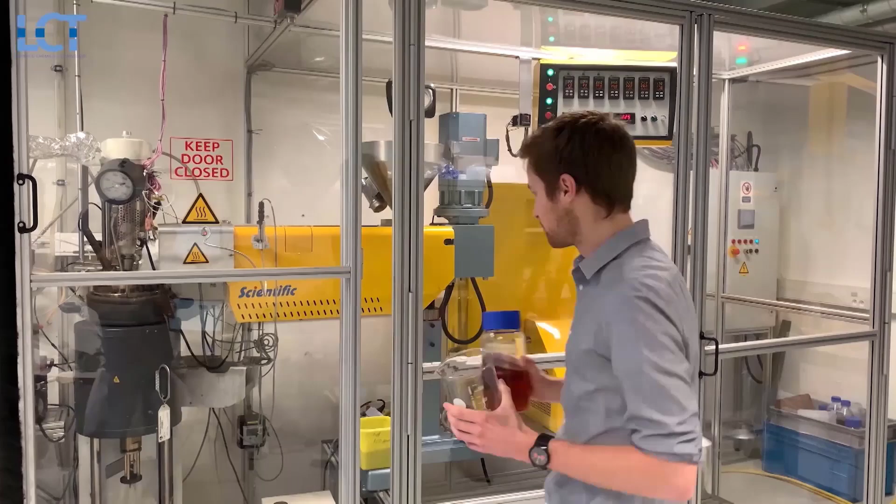It's called thermochemical recycling. We use this unit mostly for our experiments. On the right side in yellow is the extruder part, which is used for feeding and melting the plastic waste. We have the plastic waste here in this glass. It's pelletized, so we can feed it nicely to the hopper.

Then it's melted and fed to the reactor, which can be operated at various conditions, different temperature and pressure profiles. Then the plastic waste is pyrolyzed in the reactor. It leaves the reactor on top in vapor form, then it's condensed in the condenser here, and can be drawn at the bottom in liquid form, giving you a nice product like this.

The products can be used for all kinds of petrochemical processes, for instance steam cracking to produce light olefins that can then be used to produce new plastics.

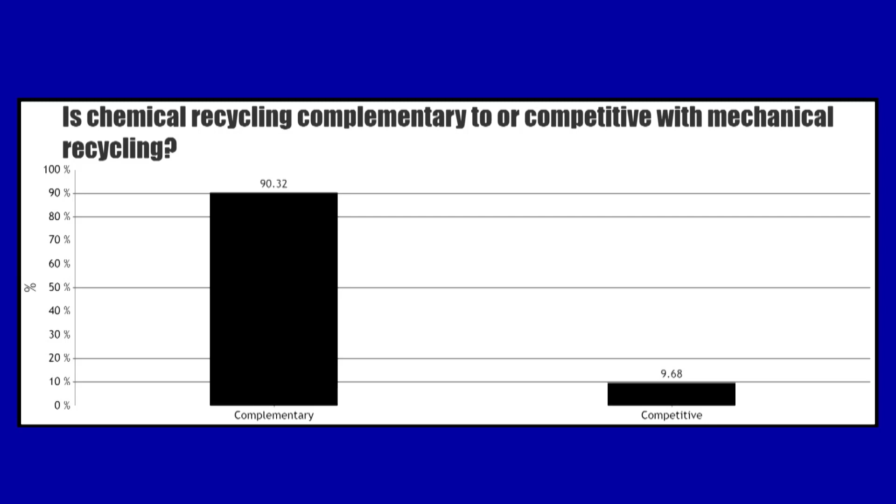Maybe Nico, you could comment on this. Vanheede is a company mostly active in mechanical recycling. Do you, what Steven said, that there might be some threat to your feedstock, would you experience that? Well, certainly, yeah. I mean, they are complementary, but there will be some cannibalization. You cannot expect that it will not happen.

The thing is, and I repeat it, that it will be complementary because, as Steven also mentioned, separation, delivering good qualities to these installations, will be key and is very important. This also gives opportunities for companies like ours. So on the one hand I say yeah, but on the other hand there are plenty of other and new opportunities for our company too.

Okay, so it's a big pond for you to fish in. A big pond, how should I say — certainly the incoming materials, as we already discussed, are becoming much bigger, the quantities. So indeed, we can still have our place in the whole circular plastic economy.

Absolutely. Okay, Philippe, maybe I want to ask you a nasty question on this. Does Fost Plus care whether it is mechanically or chemically recycled? Does it matter to you? Thank you, Kim, for your question. I first want to say that we have, as Fost Plus and in Belgium, highly ambitious targets for recycling rate, as Europe has, and both solutions are important to meet the target.

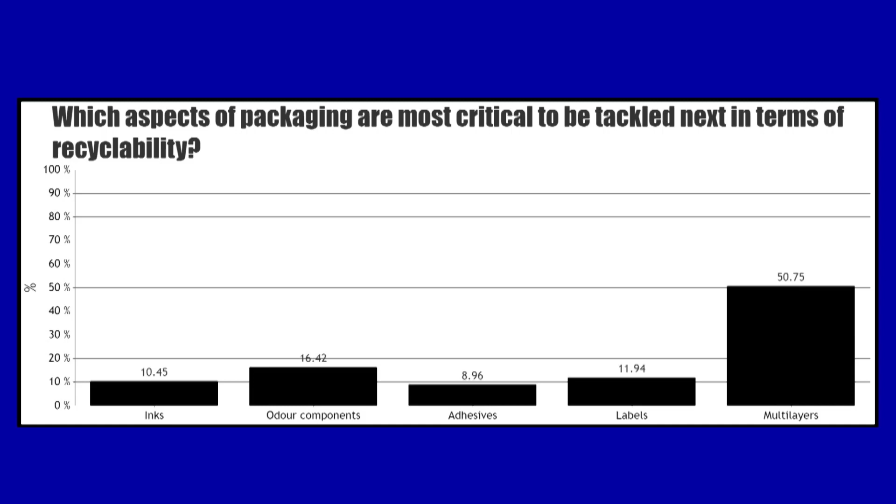Then I think there's an overwhelming response that multi-layers should be next to be tackled. Jan, if I can ask, is this also what you see coming from your members? Well, not only from our members, but also if we look to the moonshot topics we are tackling today, which are basically set by the companies, we see multi-layer and multi-component materials as the highest challenge. But others are popping up too. If you look at the moonshot targets, it's on multi-layer, traceability of components, and easy separation. So it's an end-to-end situation, but the main focus is on multi-layer, and the challenge is also to combine it with design to recycle.

Yes, absolutely. I think we are nearing the end of the event. I will ask each of the panel members in turn to give me, in one sentence, the core message they still want to deliver to our audience today with regard to plastic circularity. This can be: where should we go, what should we notice, what should we do for the future of true circular plastics? Philippe, may I start with you?

I want to say that we still need to collect even more in-company. We have a lot of P+MD in-company, and out of home we are champion at home sorting, but we still have some challenge there, and that's my message for today.